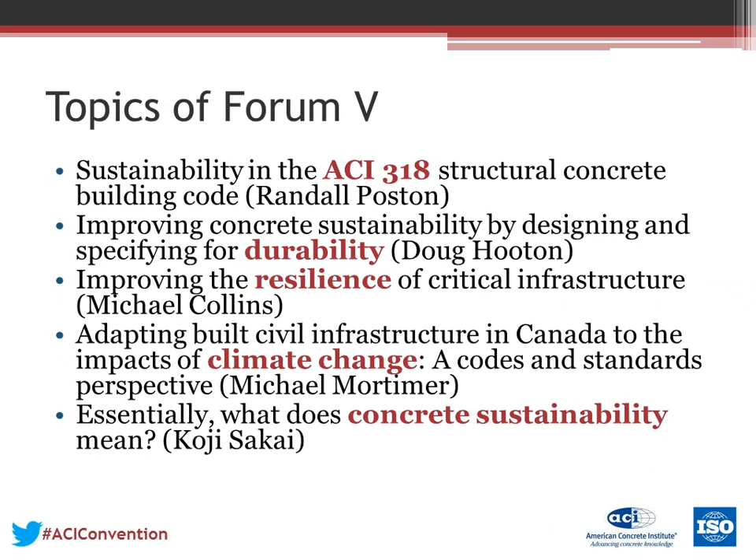And then we had Michael Mortimer, who came from Canada again. He talked about adapting built civil infrastructure in Canada to the impact of climate change, the codes and standards. And finally, I talked about what concrete sustainability means.

Then we had some conclusions from these speeches. The first one was the addition of sustainability to the 318 building code. They decided to include sustainability in the building code. It was mentioned that this is a start to embrace the spirit of sustainability in ACI.

Hooton concluded that the performance specification can increase the chances of obtaining durability. And Michael Collins concluded that robust wind and earthquake damping systems are needed to enable a new generation of more efficient and resilient designs.

We have been designing the columns of buildings by considering confinement, but after many years he concluded it is not enough, that we need different systems, like damping systems. This was a very interesting conclusion.

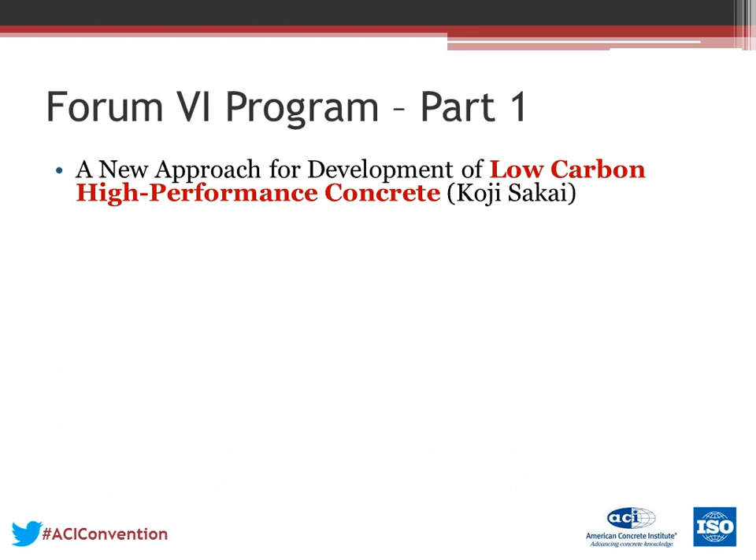And then we have Dr. Higuchi, from Japan, who is going to talk about the development of a new ecological concrete with carbon dioxide emissions below zero. And then we have the third speaker.

Dr. Barcelo from the Lafarge Cement Company. The title of his talk is A Path Towards More Sustainable Cement Manufacturing.

And then we have Professor Harald Müller from Germany. The topic of his talk is sustainable concrete structures through service life design and eco-efficient concrete.

And we have Dr. Noguchi from the University of Tokyo, Japan. He's going to talk about ISO standardization on environmental issues for the concrete sector. We are now developing ISO standardization on environmental issues for the concrete sector.

And then our colleague Julie will talk about what are PCRs and EPDs. Nowadays the importance of EPDs is greatly increasing, so she will introduce the essence of the current trend.

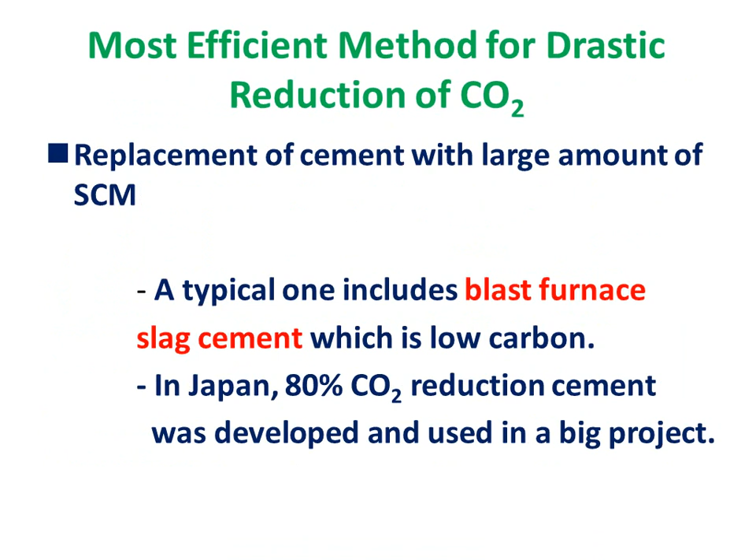In Japan, more than 10, 15 years ago, an 80% carbon dioxide reduction cement was developed and used in a big project, the Akashi Kaikyo Bridge, in 1998. This bridge is the world's longest suspension bridge. The main span is almost 2 kilometers, 2,000 meters, and the total length of the bridge is 4,000 meters.

There are two bases for the towers, shown here. We developed a low heat Portland cement for this tower foundation, as shown here. You can see the people here - very small. So you can realize how huge the tower foundation is.

So we introduced the low heat Portland cement. There are many developed cement concretes as shown here, from number 1 to number 12. Number 12 is the ordinary Portland cement, and number 10 and number 11 - this cement was applied for the foundation of this bridge.

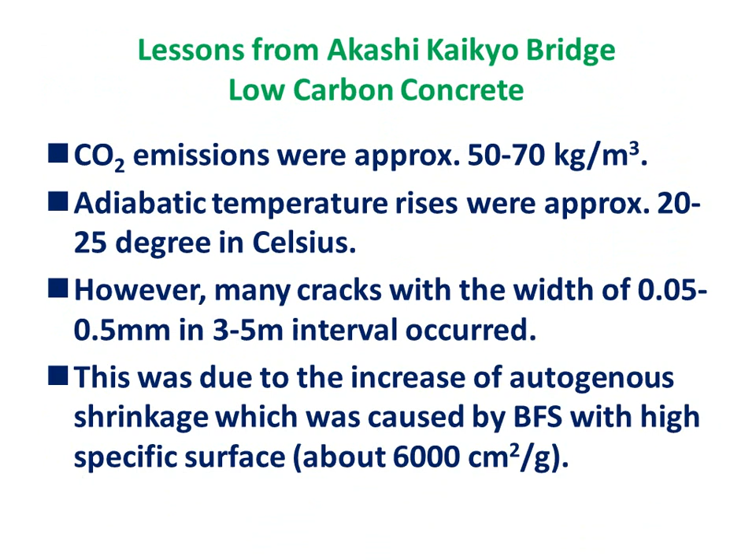So if you summarize the blast furnace slag concrete weak points: one is the large autogenous shrinkage, low crack resistance, smaller strength development, large influence of temperature and curing condition on strength development, and low resistance to carbonation. You can drastically reduce carbon dioxide emissions by utilizing this kind of concrete, but we have these weak points as written here.

As a result, we can say that we need to consider the resistance to crack in development of concrete. This is the point why we decided to develop the new concrete. There is information showing the change in compressive strength of cement in Japan.

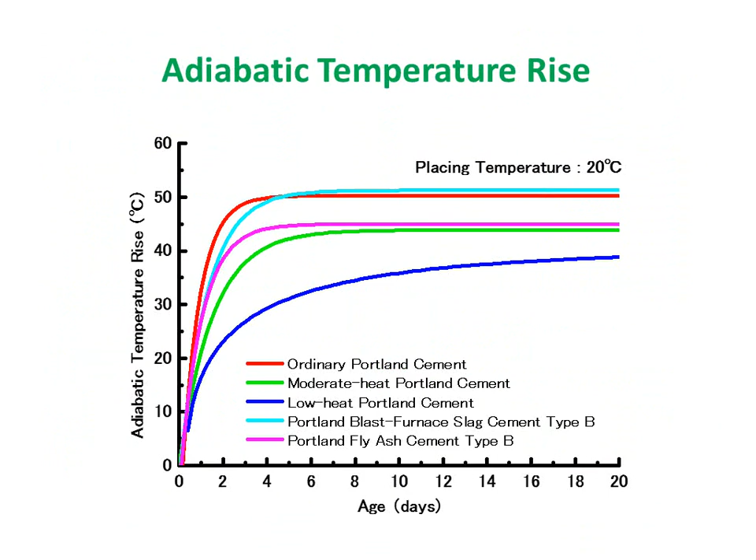So it means that if you utilize this kind of cement, you have the possibility to have cracks.

So it means that we have the possibility to do something by utilizing the supplementary cementitious materials.

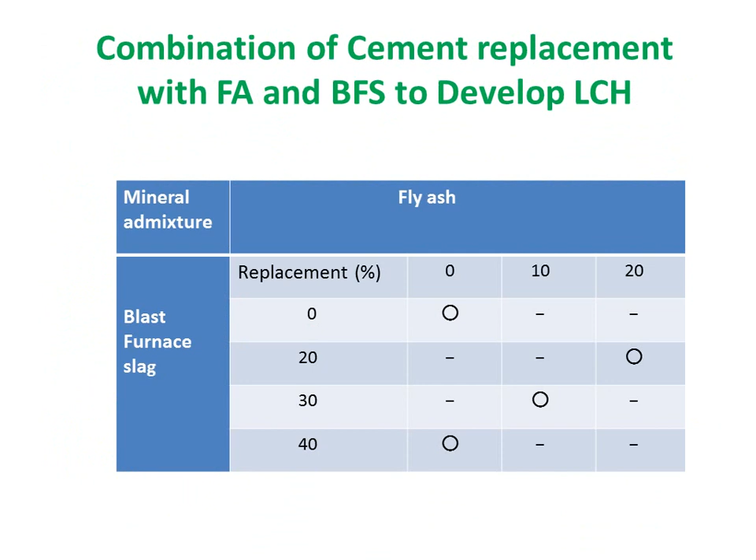...like compressive strength development. This is the ordinary Portland cement, and 40% blast furnace slag, and 10% fly ash with 30% blast furnace slag, and this is 20% fly ash with 20% blast furnace slag.

So we can see that there is a requirement for early stage strength to remove vertical formwork. In Japan, that number is 5 Newtons per square millimeter. So if you utilize this concrete, that requirement is satisfied.

And then finally, at 91 days the strength development is greater than the ordinary Portland cement, as you can see.

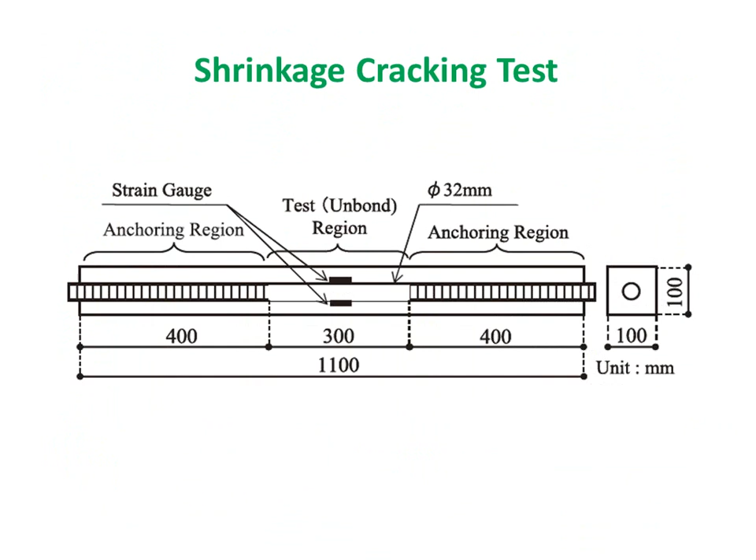We cannot evaluate the exact number of the cracking, but we can compare which concrete is better than the others by utilizing this test method.

And if we use expansive admixture, we could not see any cracking.

Then we conducted the temperature stress analysis of a constrained wall. We used nonlinear temperature stress analysis software, as shown here, and also calculated autogenous shrinkage strain using JSCE equations.

For the ultimate values of the autogenous shrinkage, we used test results at the age of 91 days. For the expansion strains, we used the test result at the age of 7 days. Under those conditions, we calculated results like here.

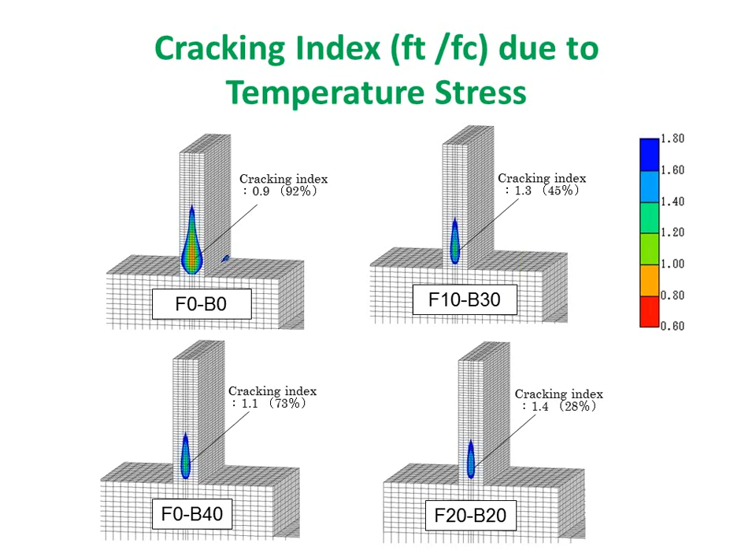This is also considered with plus expansion admixture. If you look at 20-20 in this case, it shows very low possibility of cracking.

We also conducted durability aspect testing of this concrete, including carbonation. The carbonation rate for FA20B20 was the largest, but the carbonation depth is just 31 millimeters over 100 years, meaning we can ignore carbonation performance as a concern.

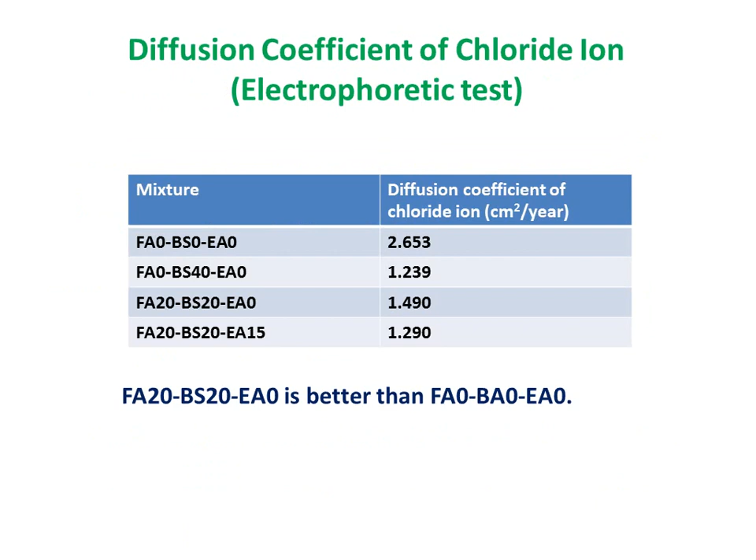How about the diffusion coefficient of chloride? 20-20 is better than ordinary Portland cement. So we found that we don't have any particular problem in the durability aspect of this concrete which we developed. So, conclusions.

This fly ash 20, blast furnace slag 20 concrete shows excellent performance in several points. First, 45% reduction in carbon dioxide emission. Second, increase of long-term strength development. Third, we can have adequate early strength development. And also, we have high resistance to cracking, and we don't see any problem in durability.

So this cement, with supplementary cementitious materials replacing clinker, would be possible at least in Japan, because we have a large steel industry and many power plants. So the production of fly ash and blast furnace slag is quite sufficient. Even if we introduce 20% blast furnace slag and fly ash, we still have remaining materials.

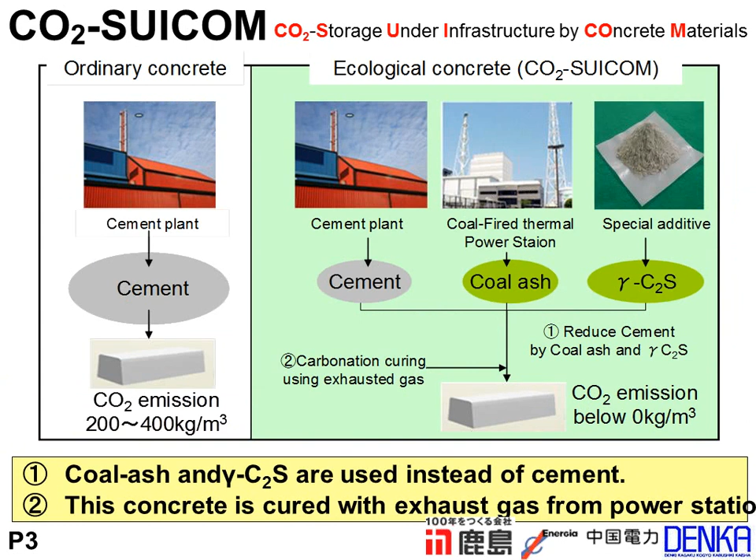The chemical and physical properties of gamma C2S are as follows: this substance consists of calcium oxide and silicon dioxide as its principal components, and the main mineral composition is gamma type dicalcium silicate. This is a powdery material, and this substance does not hydrate like Portland cement, but it reacts with carbon dioxide under optimum conditions.

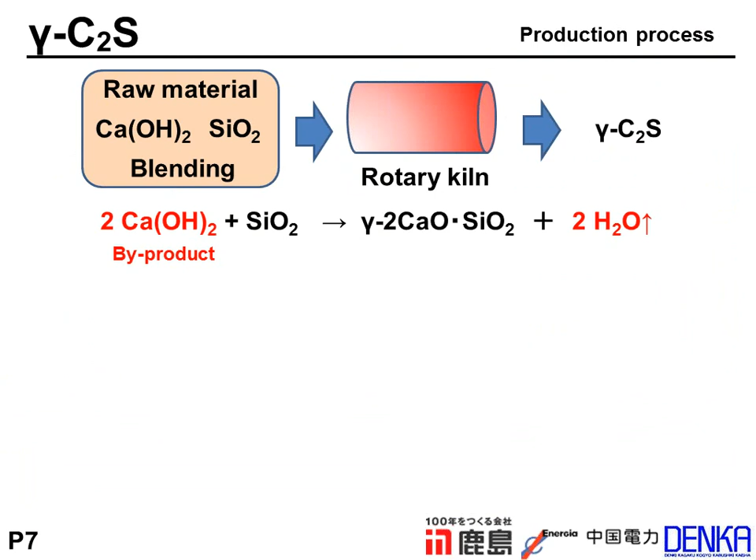This calcium hydroxide is a byproduct and does not emit carbon dioxide in calcination, so it's eco-friendly. Also, the clinker changes into powder automatically during the cooling process, so it's not necessary to mill the clinker. Therefore, the carbon dioxide emission of gamma C2S is very low.

On the other hand, gamma C2S absorbs 400 to 500 kg CO2 per ton theoretically, so it contributes to the reduction of carbon dioxide.

So for gamma C2S, which has environmental performance as one of its advantages, it's very important how to evaluate the amount of carbon dioxide in concrete. So we tried to address this problem.

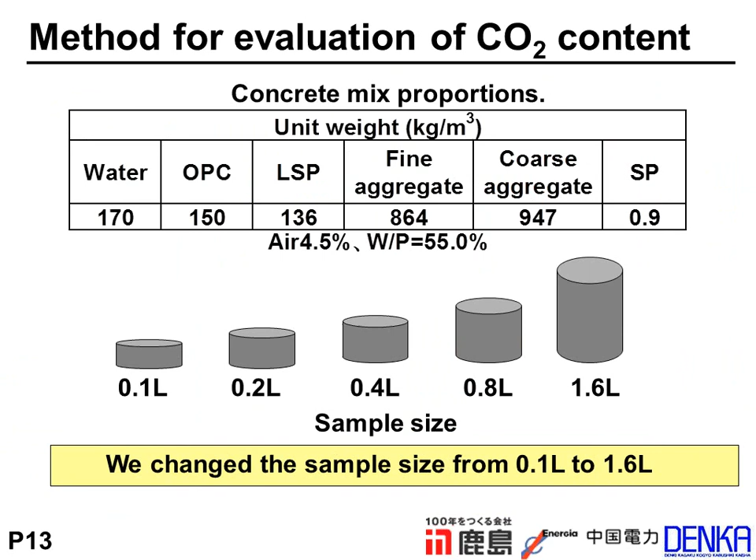So a volume of about 1.6 liter should be used in order to measure the carbon dioxide content of concrete with good accuracy.

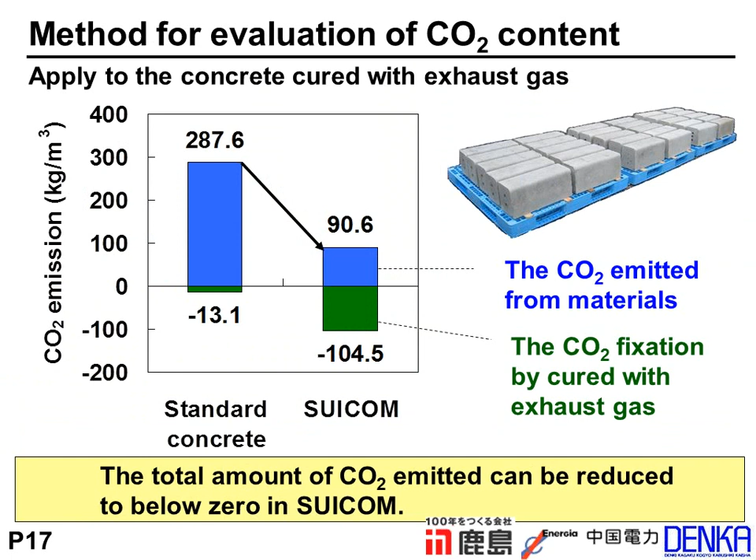Finally, I'd like to explain the properties of concrete, for example strength, drying shrinkage, and efflorescence.

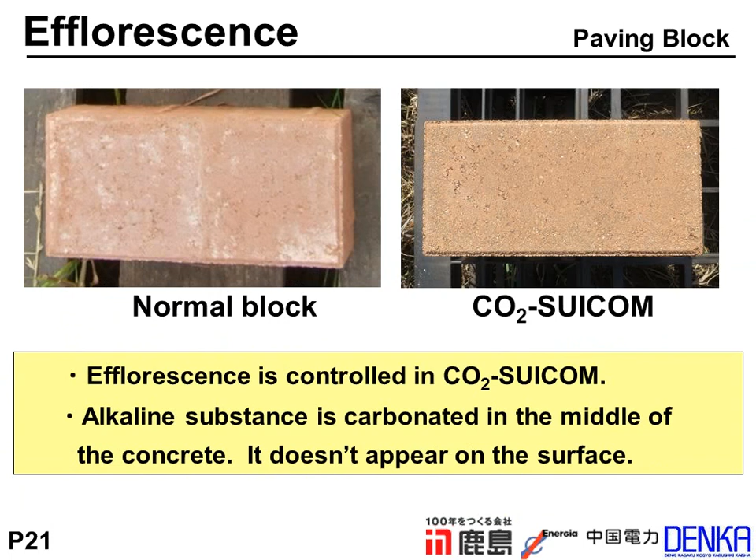The pH value of CO2-SUICOM is close to neutral by carbonation, so this condition suits the growth of plants. So CO2-SUICOM harmonizes well with the environment.

We have already applied this CO2-SUICOM to a mega solar power station as a sustainability facility, like paving blocks and border blocks. Two years have already passed after installation, and we have been monitoring the situation of the concrete.

Modern Portland cement is alkaline, so if it neutralizes from the surface with a steel rod, it generates corrosion. Therefore, it's not easy to apply CO2-SUICOM to reinforced concrete. On the other hand, volcanic ash, lime, and carbon dioxide are used for ancient concrete. Since the steel rod is not employed, the strength persists for thousands of years. So we hope that CO2-SUICOM contributes to the sustainability of the concrete industry, like ancient concrete.

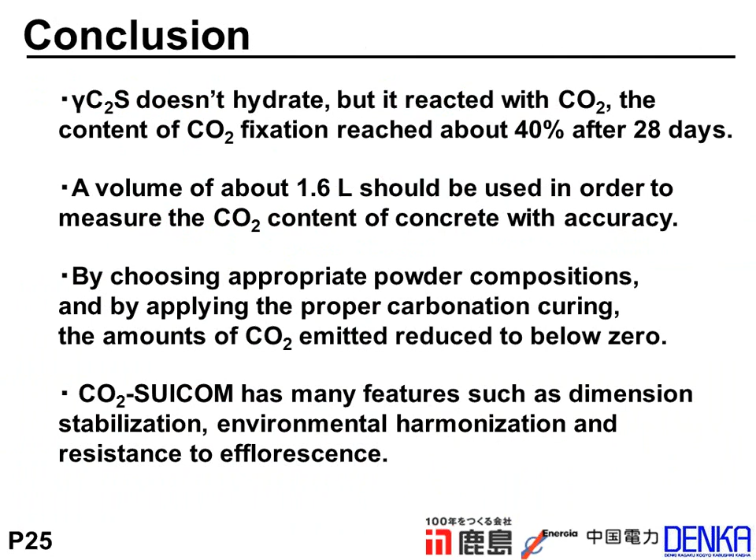The conclusion is below. The gamma C2S does not hydrate, but it reacts with carbon dioxide. The content of carbon dioxide fixation reached about 40% after 28 days. A volume of about 1.6 liters should be used in order to measure the carbon dioxide content of concrete with good accuracy. By choosing appropriate powder composition and applying proper carbonation curing, the amount of carbon dioxide emitted is reduced below zero. Finally, CO2-SUICOM has many features such as dimensional stabilization, environmental harmonization, and resistance to efflorescence. Thank you for your attention.

Thank you, Mr. Higuchi. It's a very interesting presentation. He introduced the name of this good, suikon, which in Japanese means absorbing. Interesting naming. But we have a few minutes if you have questions or comments, please.

When was the work done? When did it start? This project started 7 years ago.

We have a question from the webinar audience: can you clarify the method of calculation of CO2 emission in the sample concrete? So I repeat, we use the inorganic carbon analyzer to detect the carbon dioxide content. This device enables the measurement of only inorganic carbon gasified due to decomposition with the acid. The sample is cured, and at first the sample volume is measured. After drying, the sample is milled under 105 micron, and the content of the carbon dioxide is measured by the inorganic carbon analyzer, and we calculate the content of carbon dioxide using the volume of the specimen, so we change it to carbon dioxide content per cubic. I think the PowerPoint is being uploaded on the ACI website, so he or she can look at the details there.

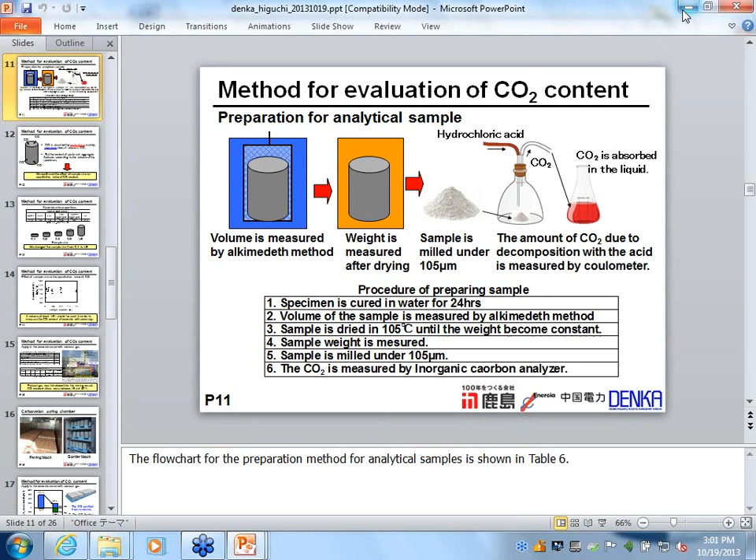So the next presentation will be done by Mr. Laurent Barcelo from Lafarge, Canada. The title of the presentation is A Path Towards More Sustainable Cement Manufacturing. Thank you very much, Mr. Chairman. So this presentation is entitled A Path Forward Towards More Sustainable Cement Manufacturing.

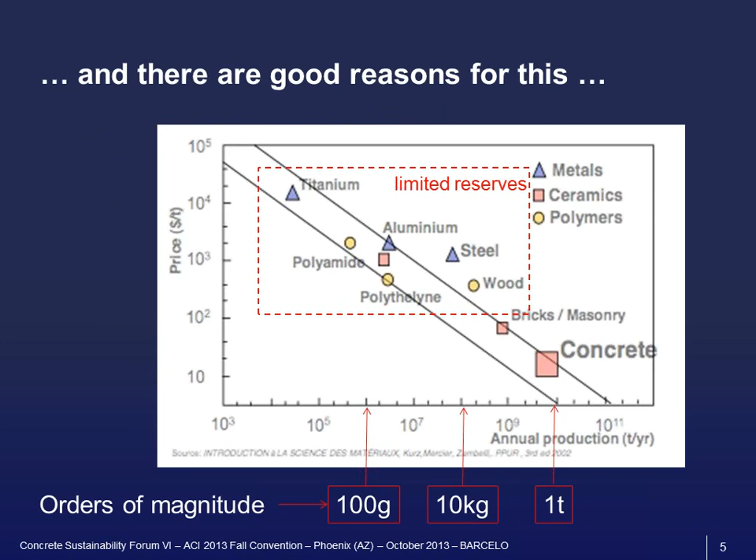Also, all these other products have limited reserves, but with concrete, with the majority being limestone, we have a lot of reserves. So cost, local availability in large quantities, ease of use, sometimes unfortunately relative robustness to misuse, versatility, durability when it's well done - very good reasons for this, and it's not going to end.

The projections from international energy agencies are that between now and 2050, cement production is expected to grow by 40 to 50%. Today, over half of world cement production is in China, and it's expected that this number will peak by 2015 to 2020, with production in China decreasing once they've built their infrastructure. But other countries are going to take off, so cement consumption or production is expected to grow very significantly.

And this popularity comes at a cost. It turns a material that has intrinsic low carbon emissions into a significant contributor to man-made CO2 emissions. You probably all know that globally, cement manufacturing is responsible for 5% of GHG emissions, and this is really the reason why.

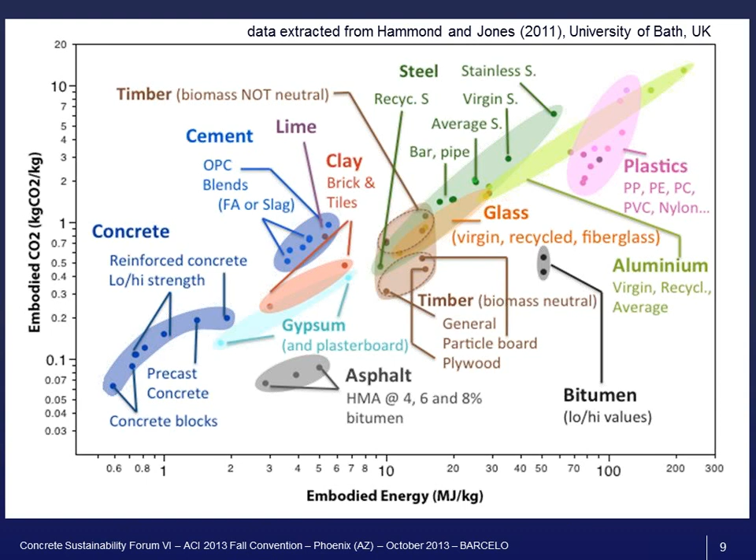I understand that ton-to-ton comparisons are not fair, and what we should do is a full LCA on a specific project. But this puts numbers into perspective, and I think we would not speak about CO2 in the cement and concrete industry if we produced as much cement as we produce steel every year, for instance. So really, we are victims of the very large volumes.

So these CO2 emissions in cement manufacturing, where are they coming from? The first source is CO2 from the calcination of limestone: CaCO3 becoming CaO plus CO2. It's about 535 kilograms of CO2 per ton of clinker, and this number is fairly constant from plant to plant.

The second source is CO2 from fuel combustion, about 330 kilograms of CO2 per ton of clinker. So it's a 60-40 split between decarbonation and fuels. But this number shows larger variation from plant to plant, depending on the process the plant is using. Add these two together and you have the direct CO2 emissions for clinker.

That's about 865 kilograms of CO2 per ton of clinker. This excludes the CO2 from electricity, which is the indirect CO2 emission. But we know that in the case of clinker and cement manufacturing, it's rather small, about 10% of the total CO2 emission.

We also know that cement is not 100% clinker. In 2006, CSI made a survey and found that the worldwide average was 78% clinker in cement. When you multiply these two, you get the direct CO2 emissions for cement manufacturing, about 680 kilograms of CO2 per ton of cement. You see it's quite far from the 1 ton of CO2 per ton of cement that we hear very often. I understand 1 ton is easy to remember, but it's really not 1 ton.

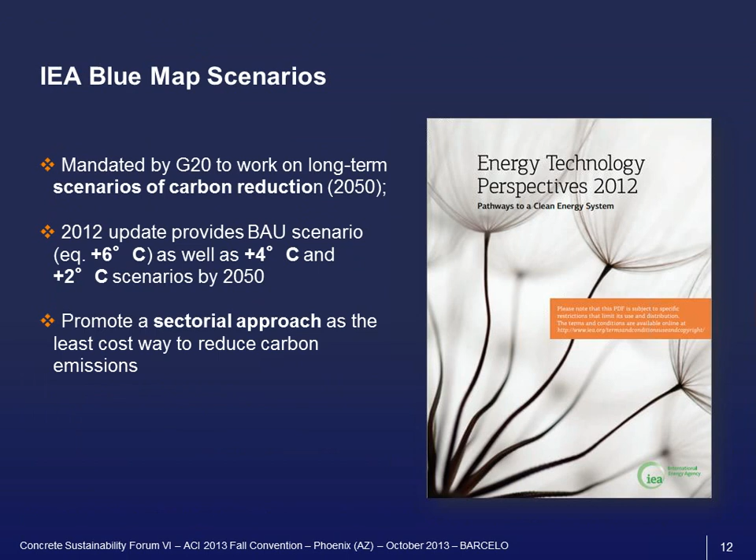One important thing for us is that they are promoting a sectorial approach, meaning they recognize it would be counterproductive to ask for the same amount of reduction in every sector, and it would actually cost more to society. So this sectorial approach is really favorable to us. They also led the development of technology roadmaps in key areas, and there is one for cement technology available that I'd encourage everyone to read. It's not a very large document.

If we look at the global picture, in 2007 worldwide we emitted about 30 billion tons of CO2. If we do nothing, by 2050 it's expected that emissions will double. The blue map scenario, to restrain temperature increase, says we should cut emissions by half compared to 2007, or by a factor of 4 compared to the baseline.

Because of this sectorial approach, the situation is different for cement. In 2007, the cement industry was responsible for 2 billion tons of CO2 emission. Business as usual would mean 2.34 billion tons by 2050, and what is expected for the industry is to go down to 1.55 billion tons.

So it's a 23% reduction compared to 2007 over 43 years. You could say that it's not a huge effort, but you need to factor in that during the same time, cement production is going to increase by 40 to 50%. When you factor this in, you see that per ton of cement, CO2 emissions are expected to go from 680 kilograms of CO2 per ton of cement to somewhere between 300 to 400 kilograms per ton.

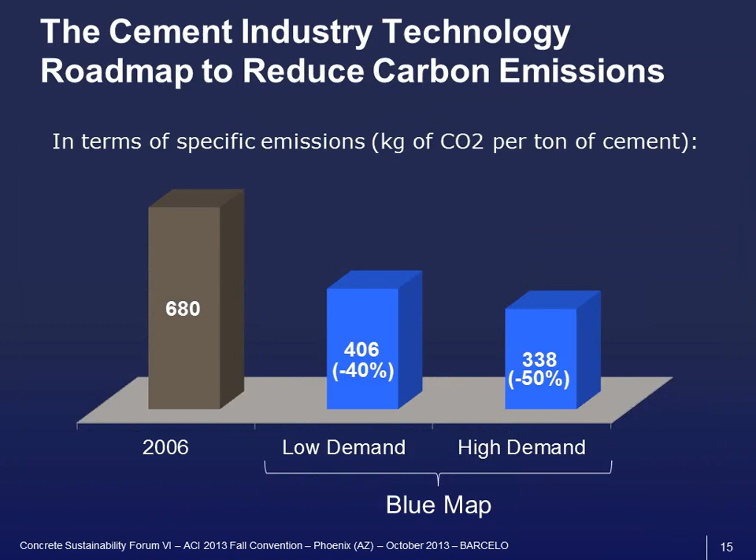So the cement industry has been using 3 main levers to reduce CO2 emissions. The first one, energy efficiency. Second, alternative fuels and use of biomass. And the third, clinker substitution. The first two play on CO2 from fuel combustion. The third, clinker substitution, is a very powerful lever because it's a multiplicator that reduces the overall CO2. We're going to take a look at each of these one by one.

Energy efficiency first. Here I've reported the energy efficiency for different types of processes in gigajoules per ton of cement. The old wet kilns were really in the range of 6 gigajoules per ton. The more modern kilns, the long dry, preheater, precalciner, what the industry considers today as best available technology is the 5-stage preheater with precalciner, at 3 gigajoules per ton of cement.

So it's about 50% more efficient than the old wet kiln. When you look at the theoretical energy consumption needed just for the chemical reaction inside the kiln, you need 1.75, meaning your efficiency with this best available technology is 58%, which is quite good. In fact, it's better than the engine we have in cars.

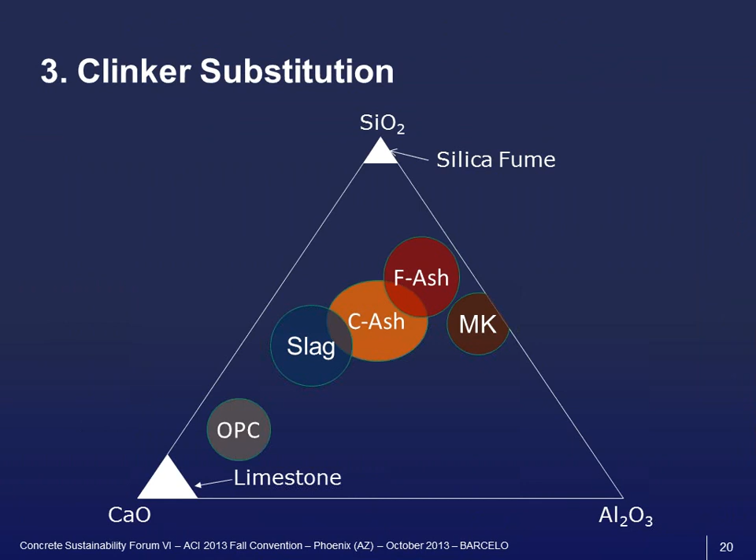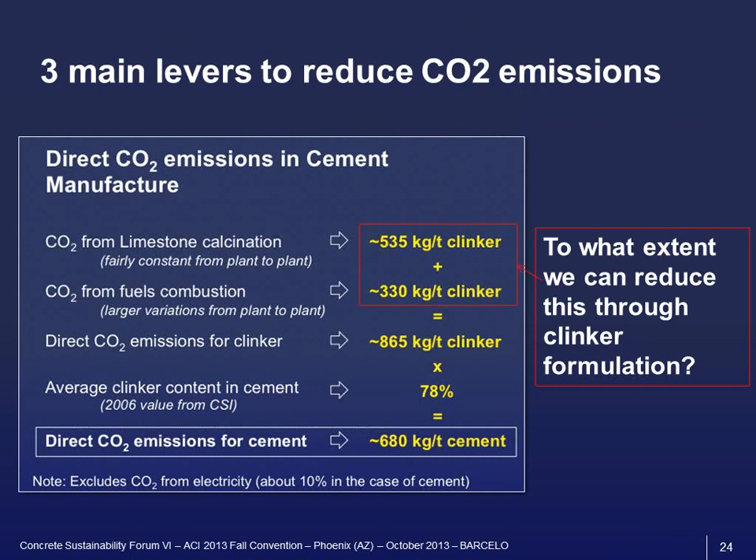What I try to do first is to explain what happens in the kiln, CO2-wise and energy-wise, when we want to produce C3S, the main component of modern cements. The first reaction that happens in the kiln is the decarbonation of limestone: CaCO3 becomes CaO plus CO2, releasing CO2 from the limestone. Driving this reaction requires a massive amount of energy, which translates into fuels that we need to burn.

So you can see here the double penalty with high limestone cements. We have a high amount of CO2 released by the decarbonation, and we have to go through this massive energy consumption for the decarbonation that translates into fuel. So it's a double penalty for a high lime system.

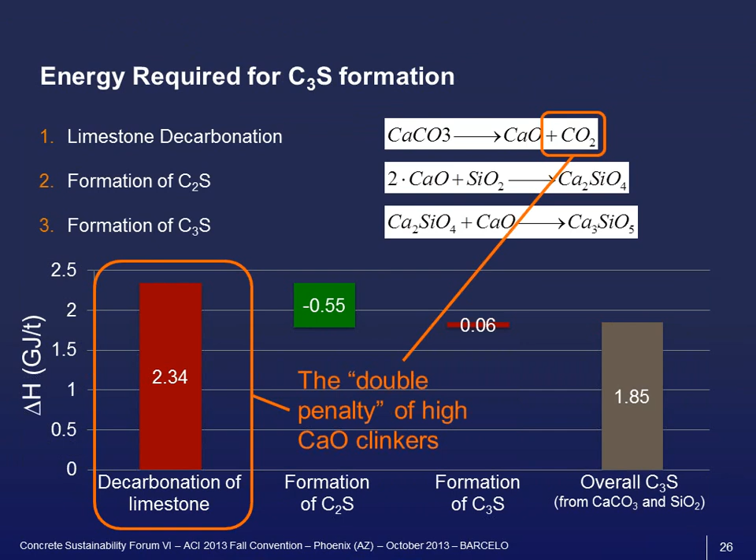So we can wonder, why not go through a C2S type of clinker? Why not eliminate C3S and make a clinker which is only C2S, C3A and C4AF — since we need a little bit of liquid phase in the kiln for the clinkering reaction — but why not go there? If we did, the CO2 footprint of the cement would be reduced by 12%, going from 816 to 719. The bulk of the reduction would come from the fuels, with only a minute reduction of CO2 from the raw materials.

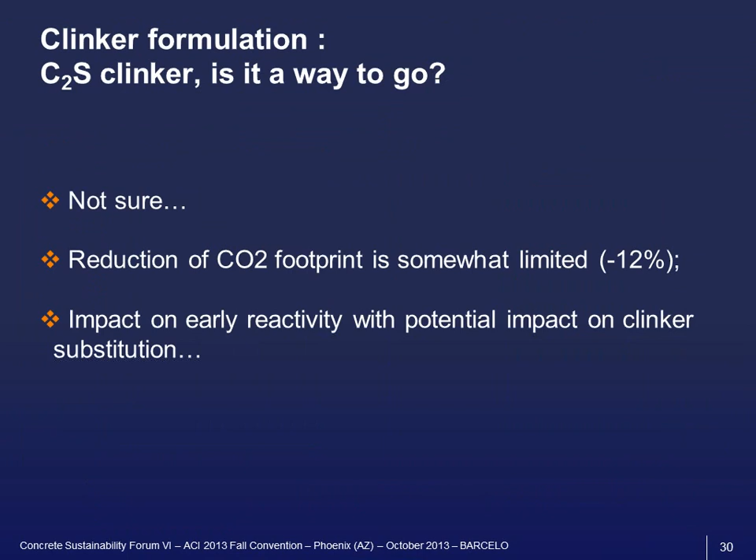So is it the way to go? We are not sure, because the CO2 footprint reduction is rather limited — it's 12% — not as significant as we would like. The second aspect is that if we go that way, chances are we would negatively impact the early reactivity of the cement, and consequently we wouldn't be able to use a lot of SCMs in the cement. So instead, we are proposing an out-of-the-box solution.

What are the characteristics of the solution we are looking for? We want a clinker that leverages all the current clinker advantages — available largely locally, cheap, nothing fancy — with a high level of early reactivity, at least that of OPC, that works well with SCMs, and that is durable, including steel protection, which discards solutions like CO2 curing. In addition, we want much lower CaO content to drive down CO2 emissions, and we want this to be manufacturable in existing plants, since building new plants is fairly expensive.

So what we are proposing is BCSAF clinkers, which we have trade-named Aether. B stands for belite, and here it's really activated belite that we are using — we dope belite with boron, producing a different polymorph of belite that is more reactive than the belite typically found in OPC. We still produce C-S-H for later age strength. CSA is the calcium-sulfoaluminate phase, producing stable ettringite that gives early age reactivity. F stands for ferrite, which is also quite important because it reacts, with a coupled reaction with belite to form strätlingite.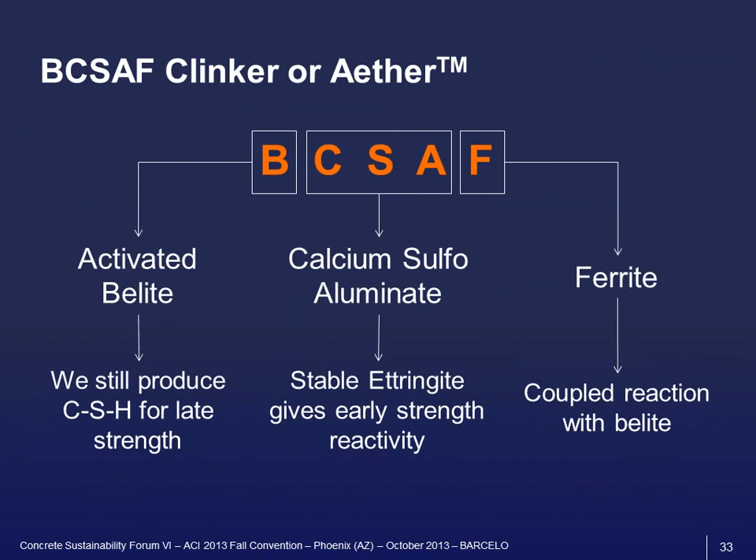The result of all this is that we can develop equivalent strengths for a lower carbon footprint. How much lower? Ordinary cement is at 816. With the theoretical C2S approach, we are down by 12%. With this approach, we are down by 30%. What's very important here is that we significantly reduce the CO2 coming from the raw materials, as well as reducing the CO2 coming from the fuels.

Where it is in this CaO, SiO2, Al2O3 diagram, so it's about here. You see it's not very far from ordinary Portland cement. Of course, there is a fourth dimension because there is the sulfate. So the belite is between 40 to 75%, so it's still the main phase. The calcium sulfoaluminate is 15 to 35%, and we still have 5 to 25% here.

So how can we achieve such a performance? You see that C3S and C3A were the phases with the higher CO2 footprint. We don't have them in this cement. Instead, the main phase is C2S. We have a little bit of C4AF, and we have a significant amount of this calcium sulfoaluminate phase. The CO2 footprint of this phase is very interesting, both on the raw material CO2 and on the fuel.

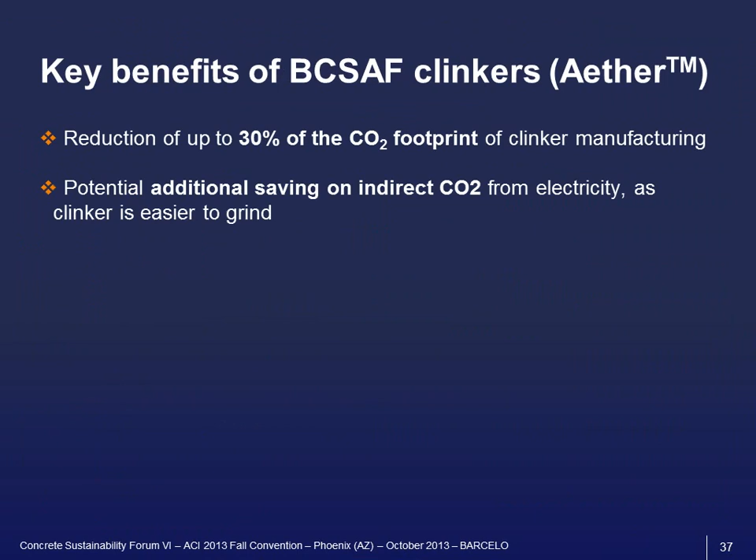So the key benefits of this: first, as we've seen, 30% reduction of the CO2 footprint. We have an additional saving on CO2 from electricity because these clinkers are easier to grind. We have a high level of reactivity that allows us to maintain a high level of SCM substitution, so we are not making a trade-off on that aspect.

We have a later strength development that is similar to OPC, and it can be manufactured in existing cement plants. We don't need heavy capital expenditures, and we can even potentially increase production rates because we are decreasing the burning temperature. We have already demonstrated that at industrial scale in real kilns, both on older generation and newer generation types of kilns.

Here we have an example of concrete made for precast application with this cement. We had a slump larger than 100 centimeters, with slump retention of 45 minutes to 1 hour for this precast application. The strength development is very interesting: 2900 psi at 6 hours with no heat, 3900 psi at 1 day, and 7000 psi at 28 days.

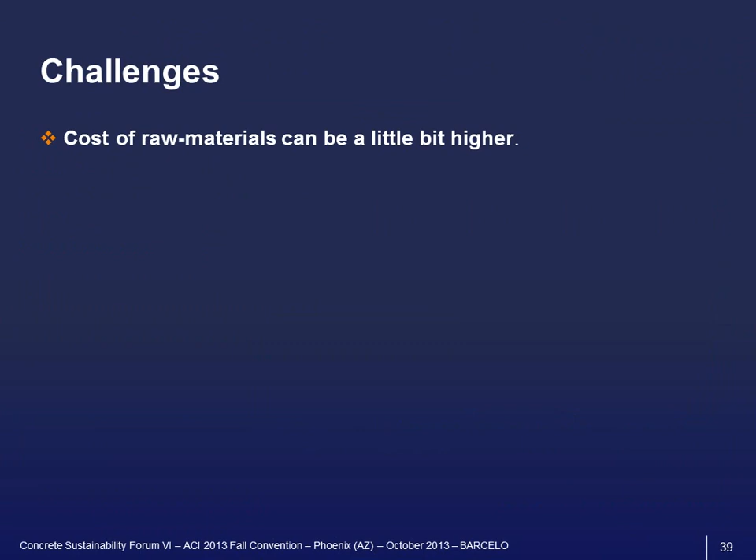Of course, we have a few challenges. The cost of raw materials can be a little bit higher, because we need more alumina in the raw meal. So some level of taxation of CO2 needs to happen to make this commercially viable at large scale. But the overcost, nevertheless, is very small, especially compared to alternatives such as CCS and so on.

The other aspect is that in cement and concrete science, we have 100-plus years of R&D, and we are still scratching our heads. So you can imagine that with, I think, 7 years of development here, we have just scratched the surface of it. Things are going to evolve, but finally specs, customer acceptance, and so on - these are challenges we are going to face.

So with that, I thank you for your attention.

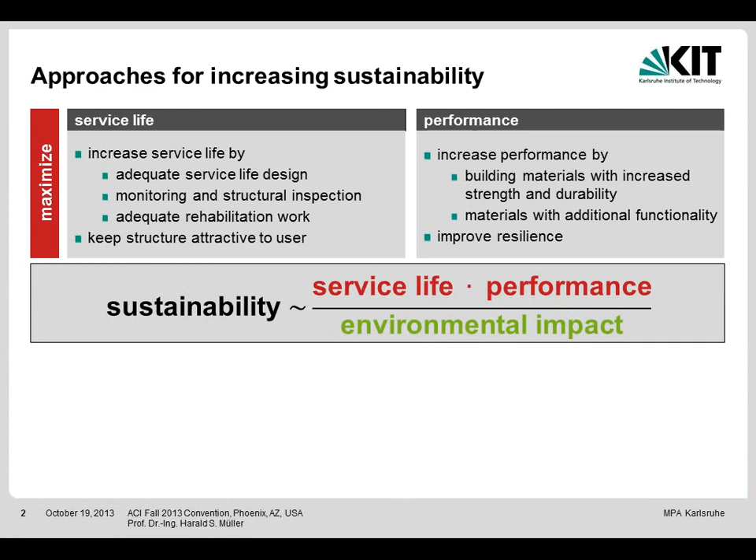First, thinking of sustainability, we have to define what we understand by it. I make a very simple formula, pushing aside social and political aspects. If we look at sustainability in this case, you see it is a product of service life and performance of concrete, divided by the environmental impact. If we look at service life, it has to be maximized to make a concrete structure sustainable. If we look at performance, it also has to be maximized to achieve high sustainability. And third, if we look at environmental impact, we have to minimize it, as the lower it is, the higher the sustainability. Now I will deal with these three different approaches in a little more detail.

First, the service life approach. Increased service life can be achieved by an adequate service life design method. Second, by improved monitoring and structural inspection, or by adequate rehabilitation work. Another aspect is to keep the structure attractive to the user.

We have first only an initiation period, and then when the overlap came, first damages increase until finally a collapse occurs. This is a situation we have in practice, and now we deal with this in our design. We apply in all countries so far a prescriptive concept. We have a very simple approach.

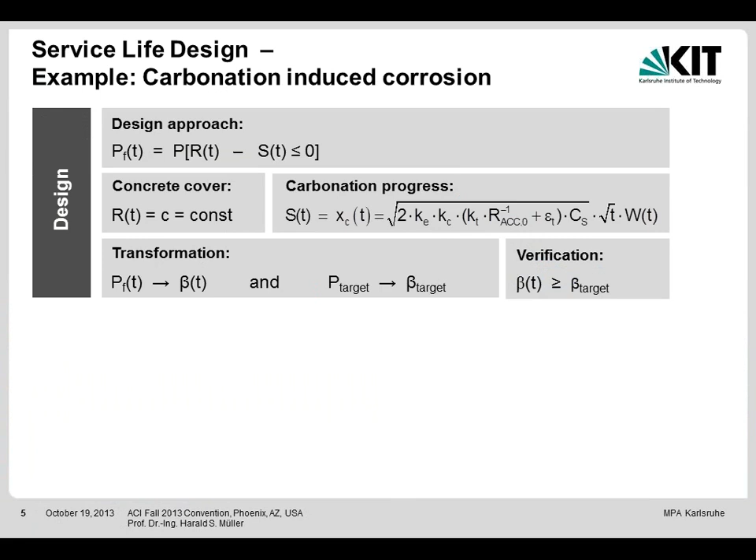It sounds much better. From a mathematical point of view it's the same, but it's better to speak of reliability than of failure probability. If we look to the result, we get the reliability index calculated from this formula over the age of the structure.

This is a design situation where the owner, for example, defines the service life of his structure. The beta target may be defined upon the damage which I am ready to accept, or the risk, or the owner's interest, or something else. You are free to decide this in your calculation.

Let me give you a very simple example. If you have, for example, a tunnel, with a tunnel top, walls, and floor, and the boundary conditions are a service life of 100 years. You accept 5% damages, which means a reliability index of 1.7, and your limit state is depassivation of the reinforcement.

Then it was carried out, and if we look, for example, just to the concrete cover, these were the design values: we have a mean cover of 55 millimeters and a standard deviation, which is unavoidable, of 8 millimeters. Then we arrive at a life age of 100 years.

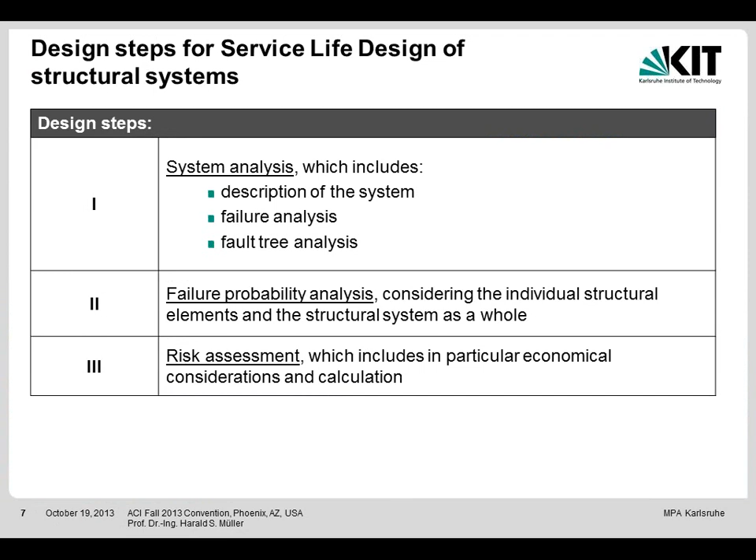If we look, for example, at a structure like a superstructure of a bridge, we have to make an element breakdown, which can be rather simple. We have to assign to the individual components - the carriageway slab, the caps, the webs, and the tension and compression chord - the major exposure conditions, and we have to define the critical ones.

For example, the critical one for the carriageway slab is chloride-induced corrosion. You go through and define an easy procedure for the major exposure condition and the critical events, then bring those things together in a fault tree for the superstructure.

Very easy to do here if you have chloride-induced corrosion or carbonation, or for example also alkali reaction or corrosion of tendons. All of those may lead to a complete failure. But they interact, and there is a further parameter, just a simple one.

We know that chlorides and carbonation have a particular interaction. Carbonation may release chlorides which had been bonded before. So doing this calculation, we have to take those things into consideration, and this may actually be done.

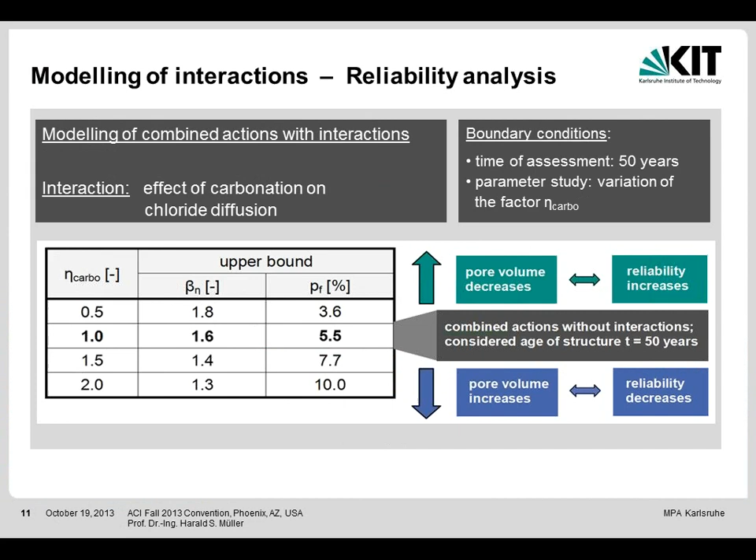I could go more into detail, but I have some other subjects, so I'll switch to the next one.

I look to the second approach, and the second approach means to minimize environmental impact. We have already heard in the previous presentations that we have to use other materials, composite cements, and so on. We have to develop concrete with a reduced binder or cement clinker content, and we have to apply environmentally friendly production and building techniques.

I will focus on environmental impact in a little different way than has been done before. If you look at the standards which are available, we have categorization in 6 classes - 6 different categories: primary energy, global warming potential (CO2), ozone depletion, acidification potential, eutrophication potential, and photochemical ozone creation.

They are delivered to you because there is an environmental product declaration, which since the year 2013 in Germany must be delivered by the producer of the raw material. And there you can read in detail the ecological impact of all those parts.

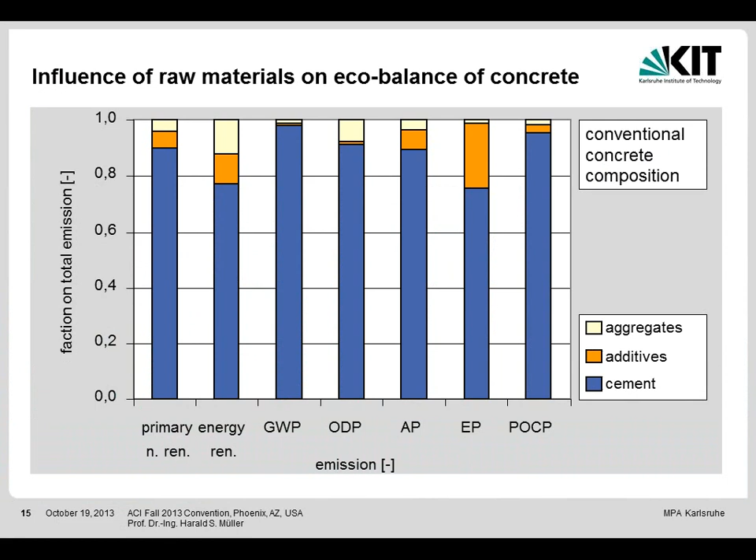This means if we would like to change things, we have to look to cement. Only if we look to the additives, in some cases where we use a lot of additives, then some effects are adverse concerning the production of concrete.

But the cement is a decisive part. Now we can consider what to do. The thing is, use as low cement as possible. We have to look at what is the binder intensity.

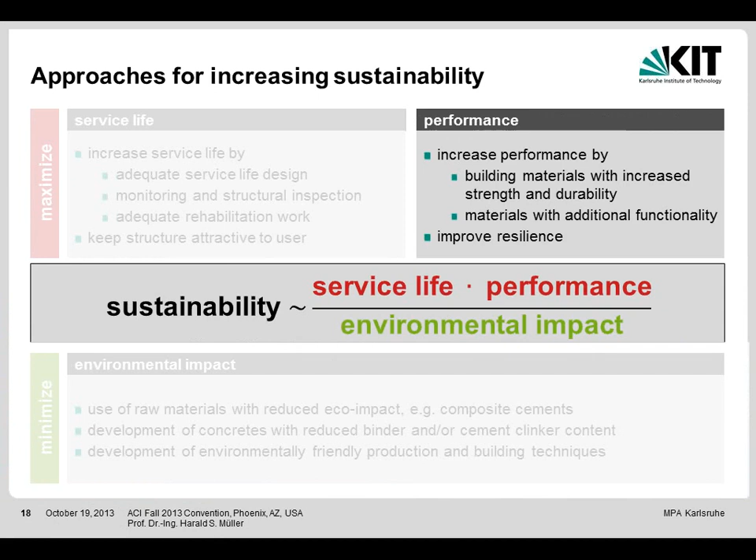Everybody knows if you reduce the water binder ratio, we arrive at high strength concrete, and for very low water binder ratios, we arrive at ultra high strength concrete, which can have a very, very high strength. At the same time, when reducing the water binder ratio, we have an increase of the resistance against chemical attack and other attacks, and the key goal behind is the minimization of the porosity. The basic requirement means a low water binder ratio, but at the same time we need sufficient workability, so we must use superplasticizer admixtures, and we must develop and optimize granular packing. There is much potential in this, but I don't go into details.

I look now to the other part, to what may be done if we go to very high strength concrete, ultra high strength concrete. Sorry, one moment.

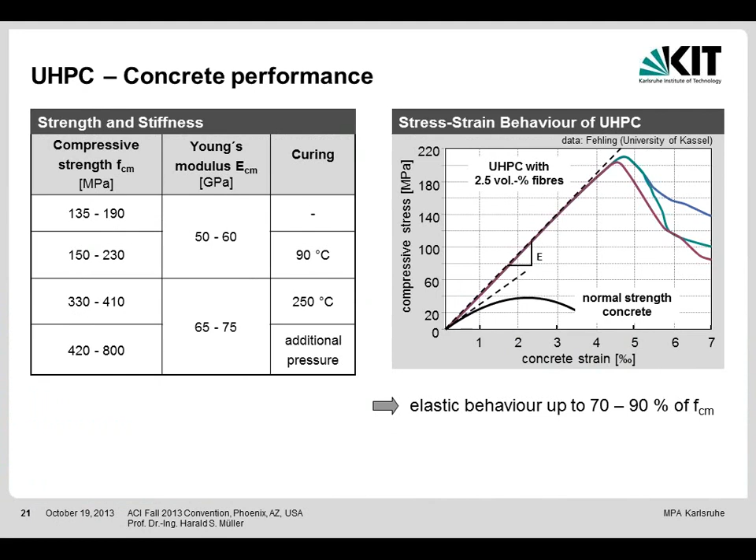Let me sum up. The sustainability of concrete and concrete structures will be increased by increased durability and by application of service life design, by reduced environmental impact of the raw material, or by an increased performance of concrete and the whole structure, or combinations of this.

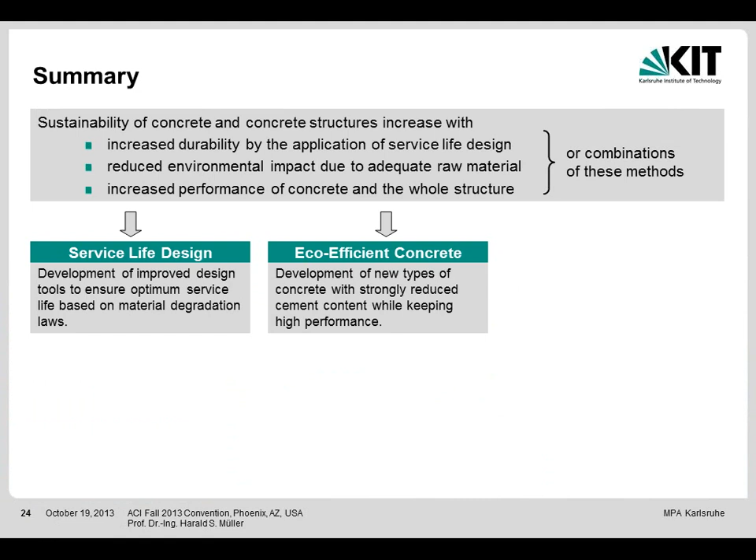Then if you use an eco-efficient concrete, you must apply new types of concrete with strongly reduced cement content while keeping high performance. This can be done, though not completely. There are some open questions here, and also some open questions there.

And for high performance concrete, I showed that the development of concretes with strongly increased strength and durability ensures a maximum of performance. The problems we have are manifold.

First, we need adequate material laws, in particular to predict the degradation behavior. I showed you some of these models, but we now have to further develop them. It is not enough. There are a lot of open questions, but it is already embedded in a guideline in the Model Code 2010.

And what is also needed is that we understand the mechanism to decouple concrete strength and concrete durability. Mostly we increase strength and we reduce at the same time the water-cement ratio, and then we increase durability. So the advantage would be to uncouple both, to have a concrete with low strength and high durability, which is difficult to produce for the time being.

Thank you very much.

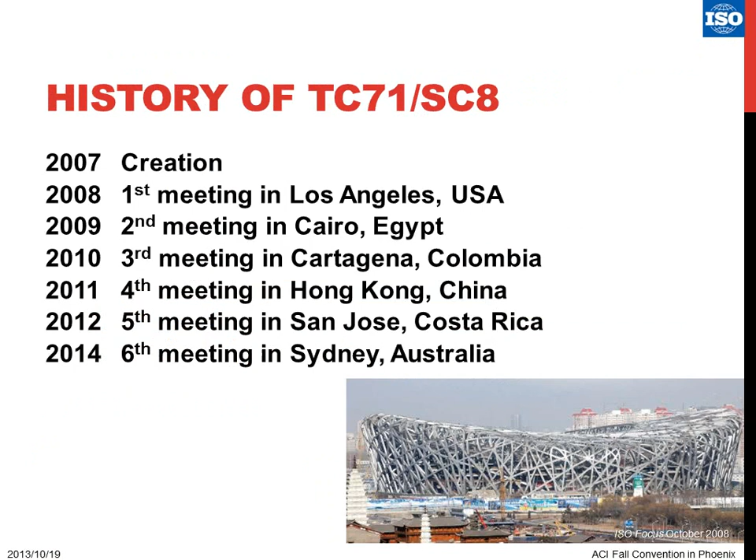This TC71 subcommittee 8 was established in 2007, and we already have 5 meetings every year. The next meeting will be held in Sydney, Australia. This subcommittee 8 is chaired by Professor Koji Sakai, who is here, and the secretariat is Japan, and I am in charge of the secretary.

Now we have 13 participating countries as active members, and 10 observing countries. The United States is a participating country. They are very active in establishing the ISO standard on environmental issues in concrete.

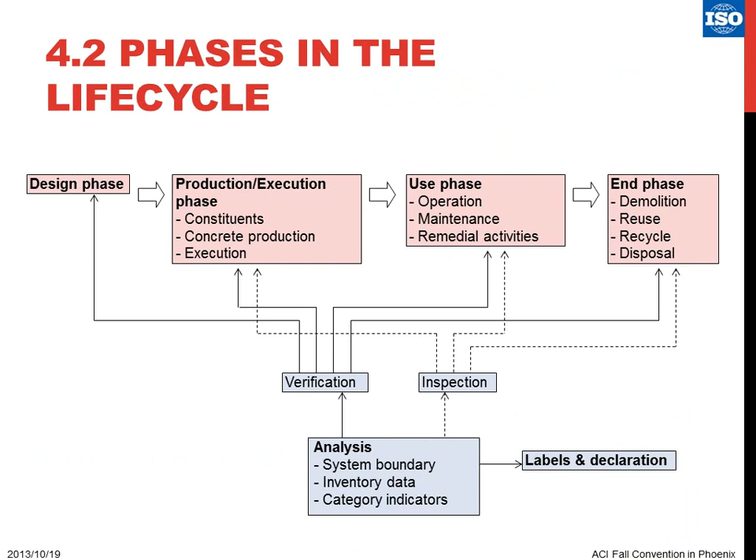In part 1, we have categorized the environmental impact into categories: global climate change, natural resource use, land use, eutrophication, acidification, air pollution, and so on. In these categories, we have to evaluate, estimate, and verify the impact to meet the requirement.

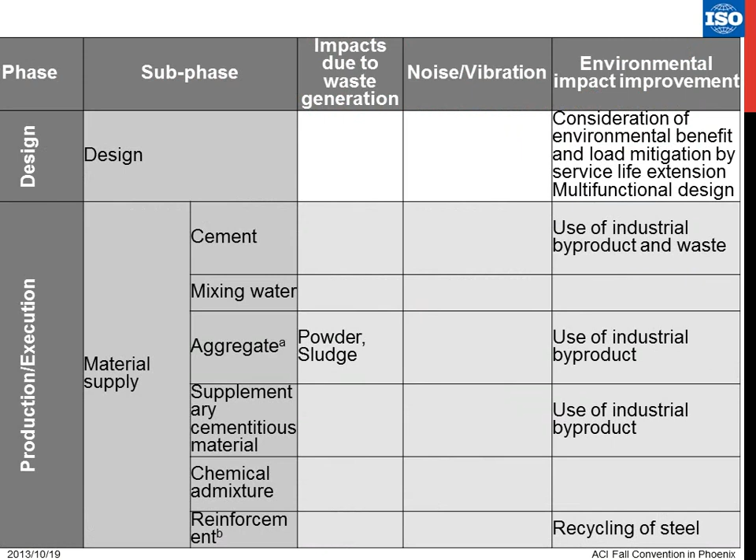Also in the design phase, we can consider the environmental benefit and load mitigation by service life extension. It should be in the design phase. And also, the multifunctional design can contribute to the reduction of the environmental impact. In the material supply phase, for the production of the aggregate, the use of industrial byproduct can be considered as a beneficial impact.

At the end phase, we may consider the CO2 uptake after the demolition of structures, and the recycling phase and the disposal phase. This table shows the environmental impact which should be considered in each phase, and also which impact should be considered in each phase.

In part 1, how to reduce the environmental impact in each phase is described like this: the execution of concrete structure shall be carried out to reduce energy consumption and waste generation during procurement, scaffolding, forming, reinforcing, compacting, curing, erection of precast elements, and so on, and to minimize damage due to noise, vibration, dust, air pollution, water pollution, and soil contamination.

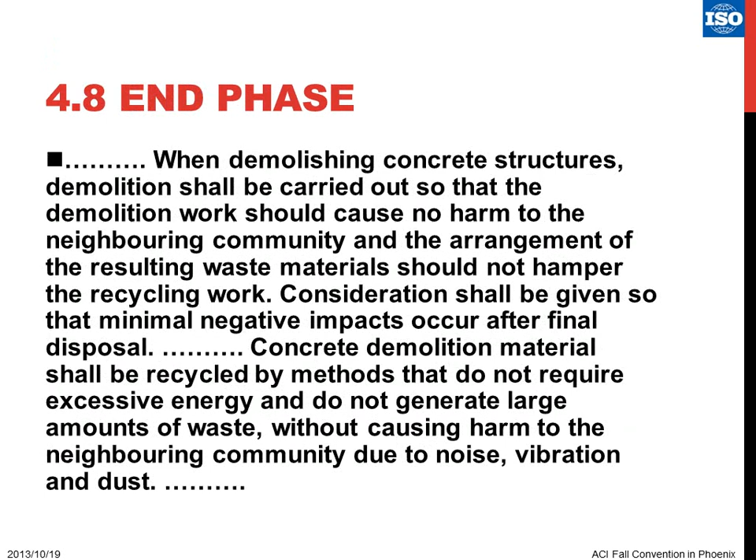This is given in part 1. And also in part 1, the result of the environmental impact assessment for concrete and concrete structures can be used for environmental declaration, rather than just environmental evaluation. It's a very simple statement in part 1, and in part 8, which will be issued some years later, a more detailed requirement is given.

The next is part 2. This part 2 specifies the system boundary and the inventory data, which is very important to make a life cycle assessment of concrete and construction in the design phase, and also in the production phase, distribution phase, and in each phase. So this is the table of contents.

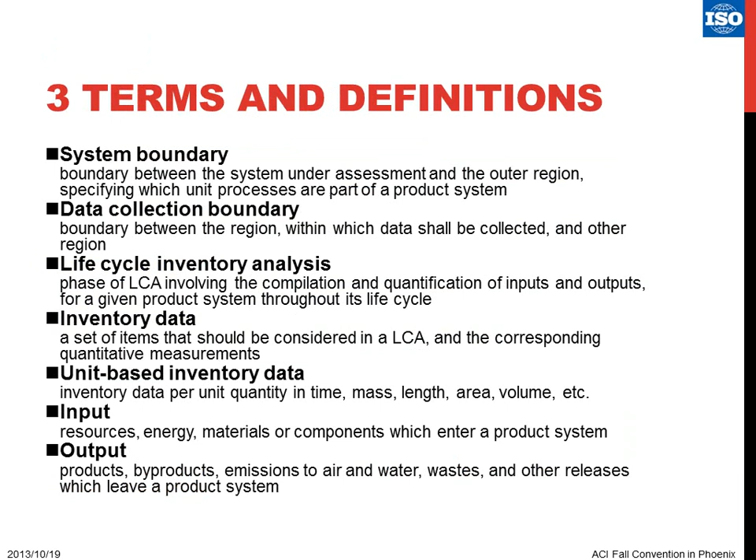So in general, for the system boundary: when conducting a life cycle assessment of concrete or concrete structures, the system boundary shall be demarcated. This is a very essential requirement. And for comparison among multiple alternatives, the system boundary shall be the same for all alternatives. This is very important to compare several projects and several technologies. For system boundary demarcation, the life cycle stages and the geographical system ranges to consider should be appropriately defined.

It is not necessary in principle to include in the system boundary the environmental impact related to the production of equipment and machinery necessary for producing concrete or construction. So we don't care about the environmental impact generated in the production of equipment machinery.

Also, activities indirectly related to the production of each material or the construction of concrete structures, such as sales administration, are very small and may not have to be included in the system boundary, but we can neglect this amount.

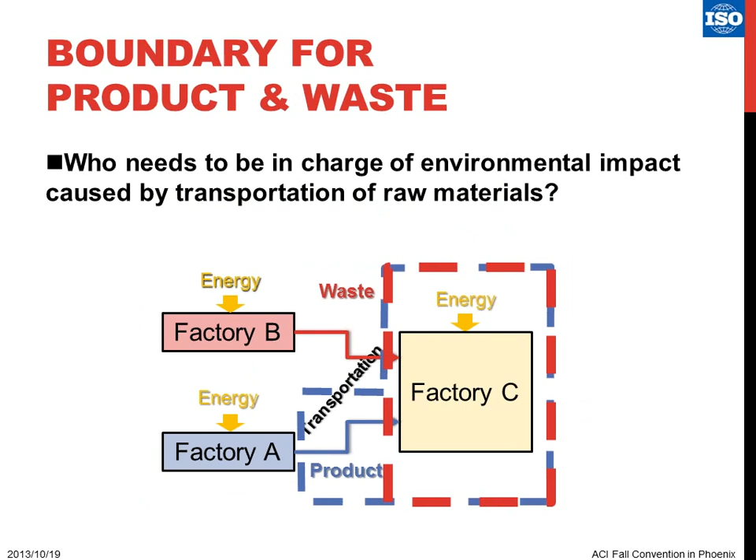So this is the answer from our discussion now: this transportation should not be included in the boundary of factory C. So it depends on whether the material is a product or a waste.

Okay, so the next chapter is the inventory data. In general, inventory data include the following: the data on the types and amounts of resource, energy, materials, and components input into the system boundary, and also the output from the boundary. Inventory data shall be objective, transparent, and reproducible.

In order to accurately acquire and calculate such inventory data, it is desirable to conduct actual condition surveys and trial experiments. But unit-based inventory data acquired and calculated in the past under the same condition may be utilized if available.

But in that case, reliable unit-based inventory data should be shown in writing — the company shows they utilize inventory data supplied by some reference. The means, conditions, and information sources of the acquisition of inventory data and the calculation of unit-based inventory data shall be expressly indicated in writing.

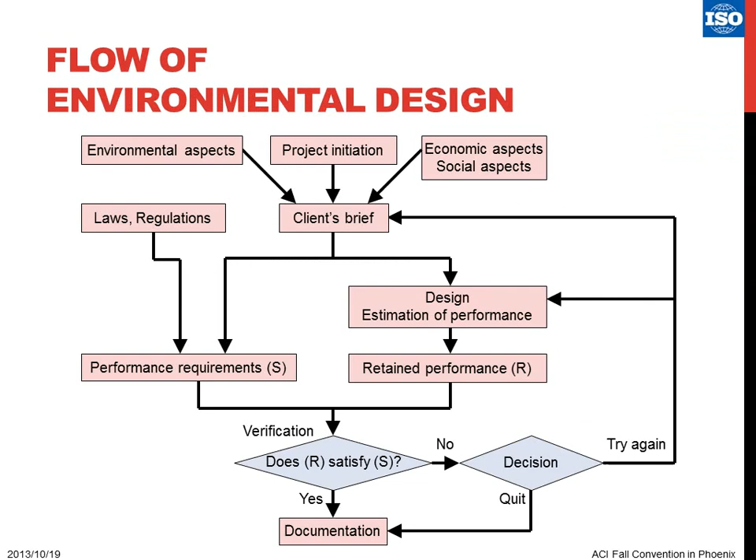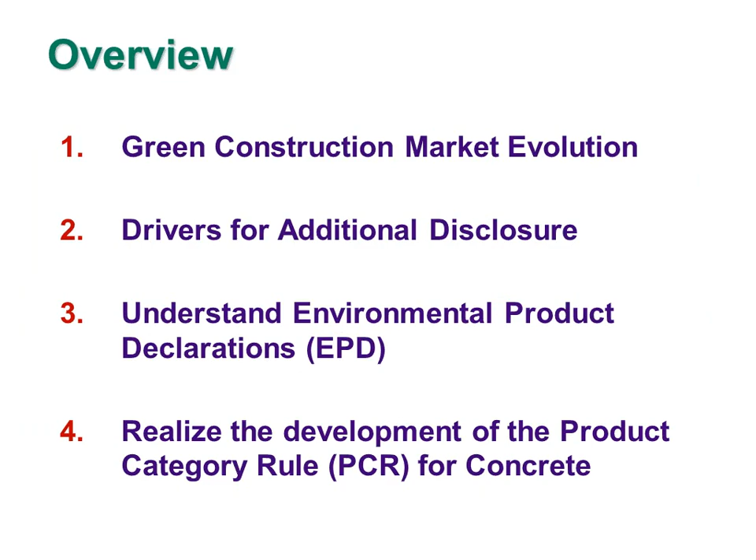Certainly if we look at green construction growth, it's nothing new for many of us working in sustainability for the last several years. It's grown to almost 71 billion in 2010, and its growth potential is about 145 billion in 2015. We can see that there are labels across all boundaries, all continents. There's about 495 labels today that we can point to all across the world.

So you can see that when you see all these differential factors and different rating systems and versions to have sustainability or greenness attached to them, we have to come to some common definitions or common science. If we look at North America, we're really looking at these specific standards: LEED, Architecture 2030, Green Roads, the International Green Construction Code, Invest, Envision. All of these are really leading in different sectors. But it comes down to, what can we find that is common across all these different rating systems?

Certainly the USGBC and the LEED rating system are the most dominant that we see in North America, and they are on the horizon throughout all the countries across the world. I receive questions from Croatia, I see questions from Singapore. We're starting to see the emergence of LEED and versions thereof in different countries. But it still remains the most popular and most adopted rating system here in North America. And certainly we can see its influence: almost 7 billion square feet are in the pipeline today for new buildings that will be under the guise of the LEED rating system.

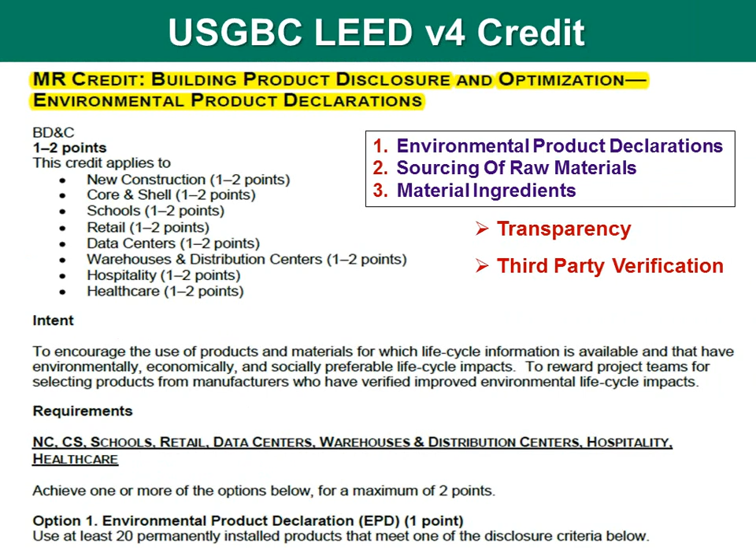When we look at one of the credits in the new version of USGBC, it's looking at building product disclosure and optimization, environmental product declarations, also known as EPDs. What's important is that for the first time we're asking for more transparency and, more importantly, third-party verification. So we're looking at EPDs, where the source of your raw materials is, and what the material ingredients are and how they play into the overall environmental impacts.

How has this changed? When we first started looking at LEED and other rating systems, it wasn't scientifically based information, but there were labels attached. There was a Type 1 label, which was something about it being 'all natural.' But we can't prove that it's all natural. We just know that they call it all natural.

In the last versions of LEED—2.0, 2.1, 2.2, and version 2009—we looked at something called a Type 2 declaration, which was really ISO 14021. It was a self-declaration. The problem was that as we've become more familiar with sustainability, we've seen that manufacturers could look at their products and make statements that weren't very scientific. That was looked at as greenwashing.

So our next step is to move ahead in the sequence and become more technical and more transparent, so we can look at a product and see how sustainable it is, or more so, what its environmental impacts are. That's where we come to ISO 14025, looking at what I'll call a Type 3 eco-label. We now look at this in the industry like a nutrition label—an actual label where we're quantifying scientifically based on ISO boundary situations.

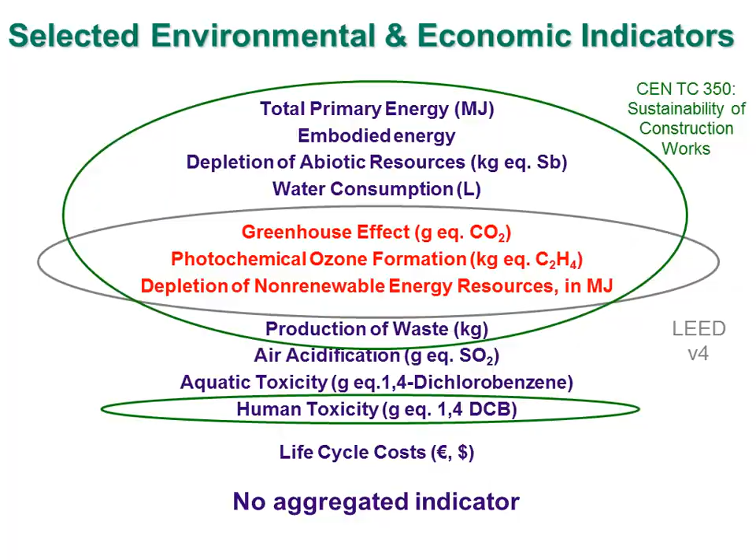But we're not here to talk about all these things. We're really talking about EPDs. So who is behind this change and why we're starting to look at environmental product declarations?

Well, certainly I think one of the main drivers here has been Architecture 2030. And we've also seen the USGBC and their change from what I would call less technical guidelines to more scientifically based guidelines. They heard the people out there that said, we like your ideas, but there's no science behind them. So why are we comparing apples to oranges? When we look at a science-based approach, now we can really compare oranges to oranges. And certainly we look at the IgCC and their construction code, and we've seen lots of local and state incentives. But really the main driver is Architecture 2030.

And it's really been adopted by 70 of the top 100 architects. Now when I talk about architects, we're not talking just about North American architects, because as the world has more telecommunication, more ability to communicate, most of the architects are working on worldwide projects. So it's not just about North America, it's really a worldwide change.

So certainly we're looking at the reduction of greenhouse gases and their impact on building operations and materials, and finally getting to that net zero. As Dr. Barsalov said, the population is growing. We still need more cement, but we have to get there somehow, some way. And when we start looking at products and how we can choose our products, we must start choosing wisely.

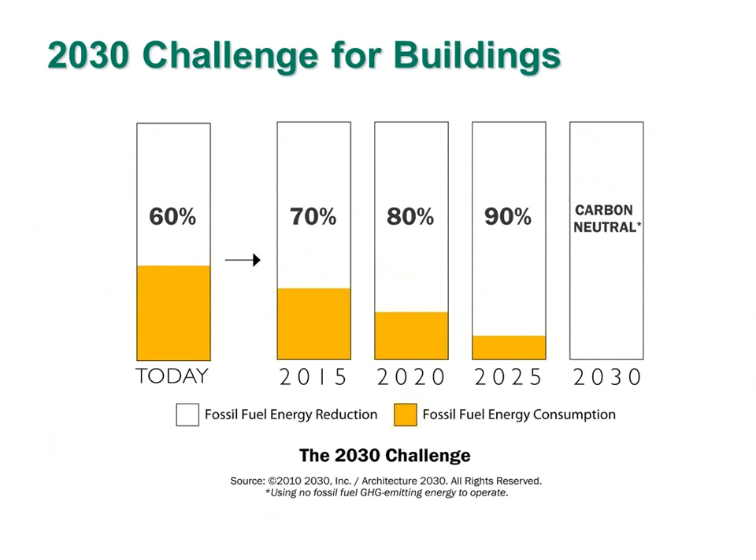So we look at the challenges for buildings, and we heard a little bit about what if I change my structure and it's an ICF structure? We need to go to carbon neutral. We need to go further. So now we have to look at how we can impact that.

Certainly we look at a challenge for products. So now if we look at this, we've gone from the building now down to the products. How can we quantify the impacts of those products? We can't really quantify if we just say, I believe it's sustainable and it's got 20% recycled content in it. It's really not talking about environmental impacts on the overall usage of that building or the use phase of that building.

So certainly we have to do this better. As I said, what are the stakeholders? The top firms that are working around the world, not the top firms just in North America. They're around the world. We look at ARA, AECOM, URS, Jacobs, Bechtel. All of them are working on worldwide projects.

If we were at the international luncheon tomorrow, we would hear about the Panama Canal. Again, worldwide engineering systems that are being looked at. And not only that, we have contractors, Turner, Gilbane, the big names that we have heard from around the world are all now looking at how can we scientifically capture and how can we account for what we do in buildings.

So when we look at sustainability, we still see ASTM. And ASTM, again, has announced that their intent is to look at PCRs and study PCRs and EPDs, but more so they're going to become a program operator so that they can help quantify for others in the industry what the environmental impacts are through environmental product declarations.

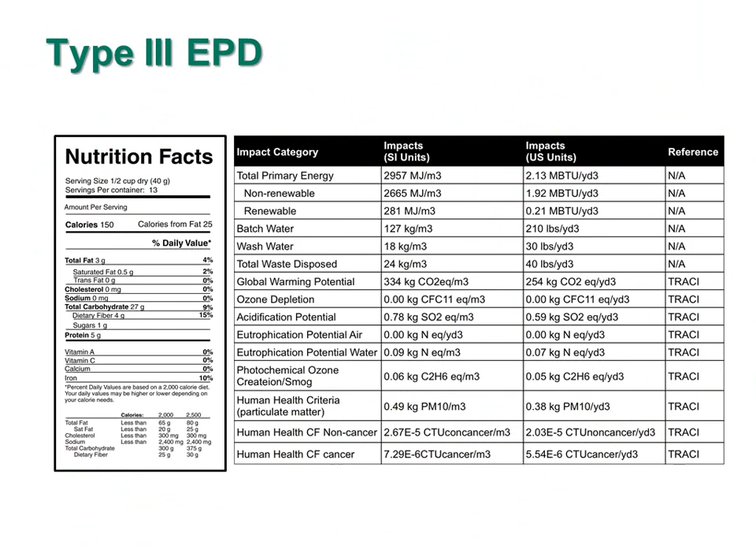So certainly when we look at an EPD, it's really translating that life cycle assessment data into environmental impacts, and it follows the ISO criteria.

Now what's important to understand about an EPD is that you can use an industry EPD, which we're seeing right now in North America. You can use a company EPD, which is more product specific, where a company goes ahead and develops their own EPDs, and these can be specific to a certain plant even. So it can become much more detailed, as detailed as you'd like it to be.

EPDs are reviewed and updated every 3 years, so again this is a work in progress. Just as we've seen more technical stringency, we're going to have to see an update of data because processes change, the way we manufacture changes. So when we see new cements and new products, their impacts have perhaps changed, and we need to account for those.

So if we look at life cycle assessment again, I'm not going to go through this in detail because Dr. Noguchi did a very nice job, but we can look at the part of the management standard and say, okay, if I'm making concrete, what am I concerned about? I'm certainly concerned about the cement, the aggregate, and the water, the materials that comprise concrete.

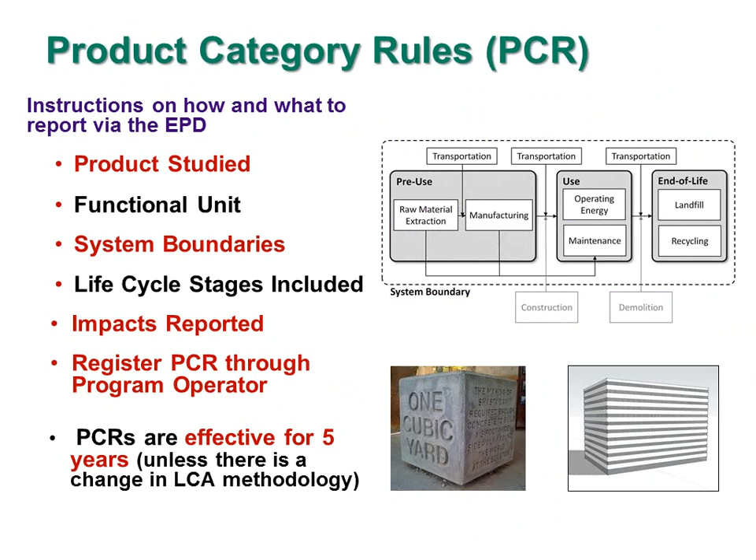Certainly, then we must register the PCR, and this is done through a program operator, and as we saw, ASTM is going to become a program operator. There are other program operators such as NRMCA - there are varied program operators. PCRs are effective for 5 years unless there's a change in the life cycle assessment and methodology.

So again, we're comparing apples to apples, 1 cubic yard of concrete versus 1 cubic yard of concrete. We're not comparing concrete versus steel - they're separate. So how do we make the EPD then? How do we go forward?

Just like when we looked at LEED and said this concrete is an assembly of materials, we must now additively look at all the EPDs that go into concrete. So you would have the admixtures, you would have the EPD for aggregate, you would have the EPD for slag cement, for fly ash, for cement. These all go into this product that we call concrete.

And then you would take all the EPDs from all the different products that are used in the building, and we would collectively put them together to create the whole building life cycle assessment.

So can we do this for concrete? Everyone finds this quite frightening. We have thousands of mix designs. What are we going to do? We have a new mix design developed for every single project. How are we going to account for that? Yes, it's going to be difficult, but it's not undoable.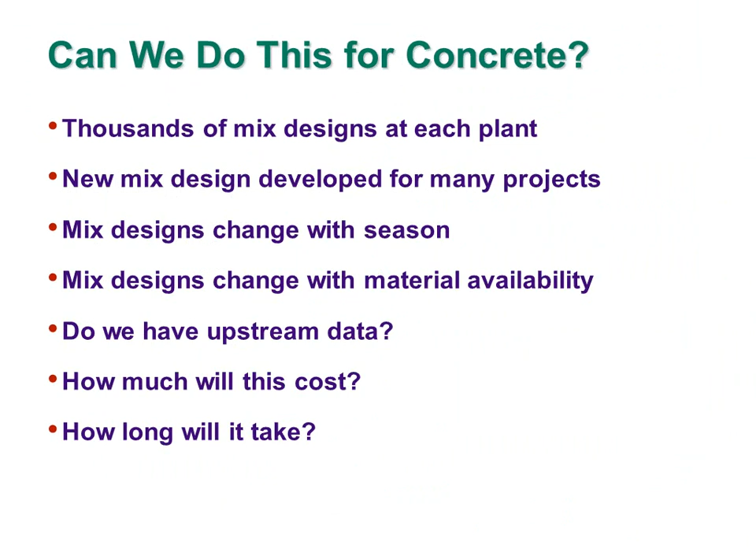So we have to look at upstream data. We can look at averages. The PCR for concrete has been developed by the Carbon Leadership Forum, but it is being reviewed and revised under ASTM at this point. If we look at the state of the industry for the PCRs we're concerned about, concrete, cement, slag, and fly ash are all in different steps for the PCR. All of these are industry PCRs at this time. There's only one company that has an EPD out at this point.

So the PCRs have to be developed before we can make the new EPDs. Going back, when we look at the PCR, what is the declared unit? In this case, it's 1 cubic meter or 1 cubic yard of concrete. What's required? We need to know what is the specified compressive strength at the age - so it's either 30 MPa at 28 days, or whatever the MPa of that concrete is. Because if I'm choosing concrete from producer A and concrete from producer B, I can't compare 6,500 PSI concrete versus 4,000 PSI concrete.

They're different, so I have to look at them equivalently across the board. Optionally, you can look at exposure class. We could look at some design criteria or other performance criteria. We're going to have to look at the life cycle stages - raw material supply, what is the transport, manufacturing, the construction process. We can look at transportation. These are all the things that are going to feed into our final LCA.

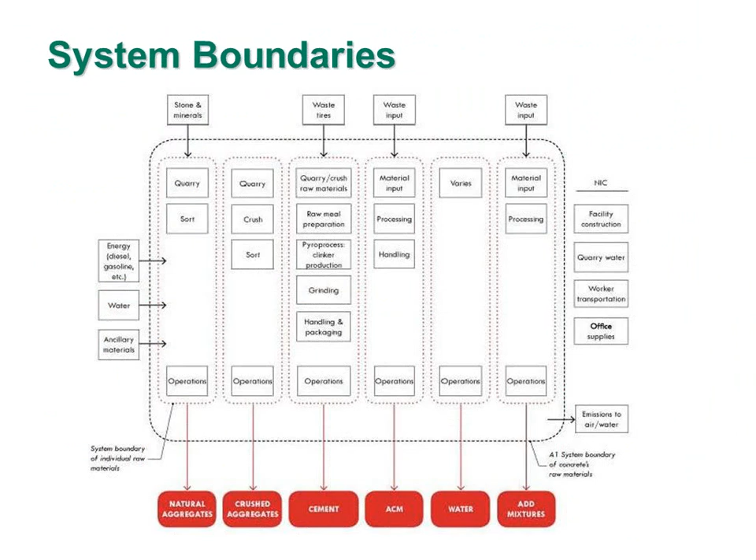So impacts that need to be reported are based on ISO boundaries. We're going to be looking at climate change or carbon footprint, ozone depletion, acidification, eutrophication, photochemical ozone or smog, and all of these are under TRACI, which is the Tool for the Reduction and Assessment of Chemical and Other Environmental Impacts.

Some life cycle data that can be reported as well is primary energy, total water consumption, looking at the concrete batch water, hazardous waste, use of primary energy, carbon emissions from biofuel. So everything we've talked about in the sustainability world and the impacts we might see are really viewed quite scientifically when we start looking at PCRs and EPDs.

So a selection of data - are we going to be very plant specific? Are we going to use company weighted averages? Can we use a regional weighted average? We have to be ISO compliant, and we have to make sure that the life cycle inventory data, which is basically the data that everyone is giving for the input, is reviewed. Certainly we need to look at the default LCI sources, and these right now in the PCR for concrete are being included in Appendix B, and again ASTM is reviewing this.

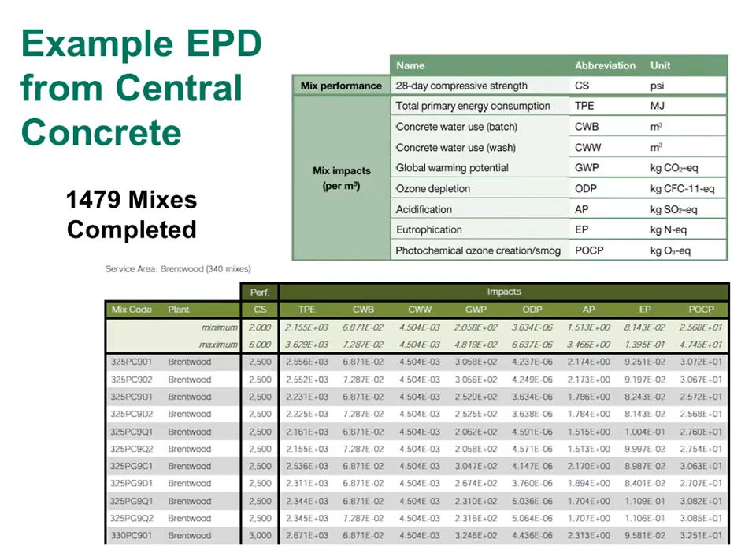So when we look at their document, it starts out that it's an EPD. It's talking about service areas that are covered, so this is actually looking at eight plants. And you go on to the next page. It's a declared product.

Program operator—so who was the person that helped them put the PCR together? That was NRMCA. Who is the LCA developer and EPD developer? It shows it was Climate Earth.

Who was the independent verifier? So you have verification by one group, but then it must actually be third-party review too. So they had a third-party review from Athena, and then they talk about the product category rule and the date of issuance. They have product description, the declared unit, the life cycle assessment, a summary, and again a summary of the limitations of the EPD.

So there are limitations obviously that we need to be aware of. Some of those limitations are that life cycle impact assessment results are a relative expression. So they're saying they're data, but there are some boundary conditions related to them.

Certainly if we look at Portland cement, they describe the products comprising the EPD and where they might have received that particular EPD that rolls up into concrete. So they have Portland cement, fly ash, slag cement. And again, because these PCRs and EPDs were not developed yet in the United States, you can see that they actually used the EPD from Switzerland because it's the best one that they had to use at the time. There are little differences between the European system and the North American system, but it's the best they had. So they went ahead and used these.

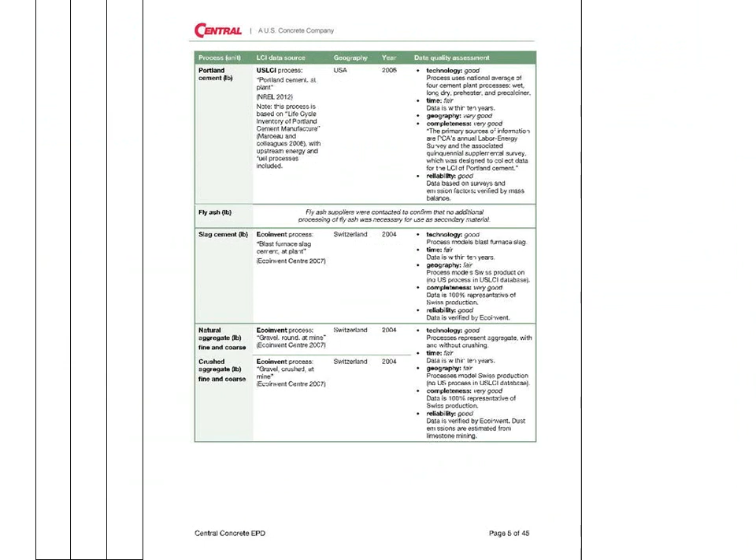And again, for accelerating admixtures, they're looking at their admixtures, and again, the geography from the EPD they used was Europe, because North America is still in the developmental stage of some of the EPDs. All right, environmental impacts—I'm almost done here.

Appendix, again, they're mix designs. You can see they came out, and they list all the types. So the data needed for the LCA includes the materials used over one year, the distance to the material supplier, the energy, water use, and mix designs.

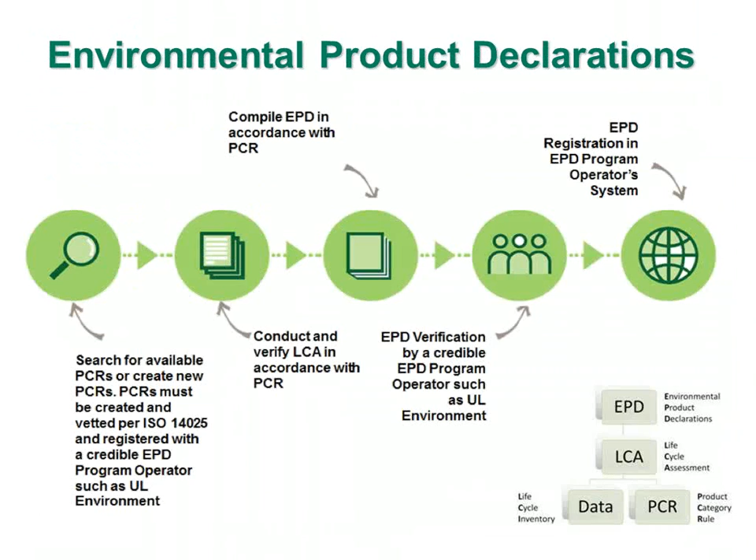And again, going through the system, you search for the PCRs, or a new PCR must be created. You conduct and verify an LCA. There's verification, registration—so everything has a very nice order to it.

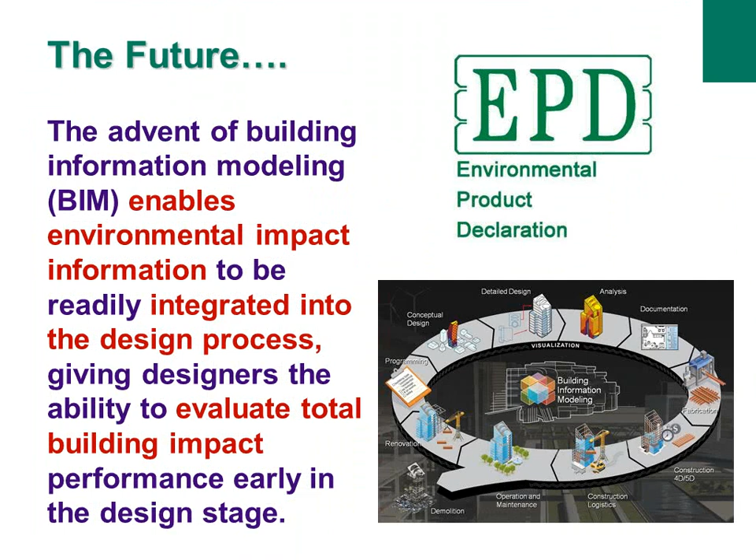So EPDs are here. They establish relevant boundaries. There are industry averages that can be used, but certainly I see this as a step forward toward more stringent requirements and more scientifically based ideas when we look at environmental impacts.

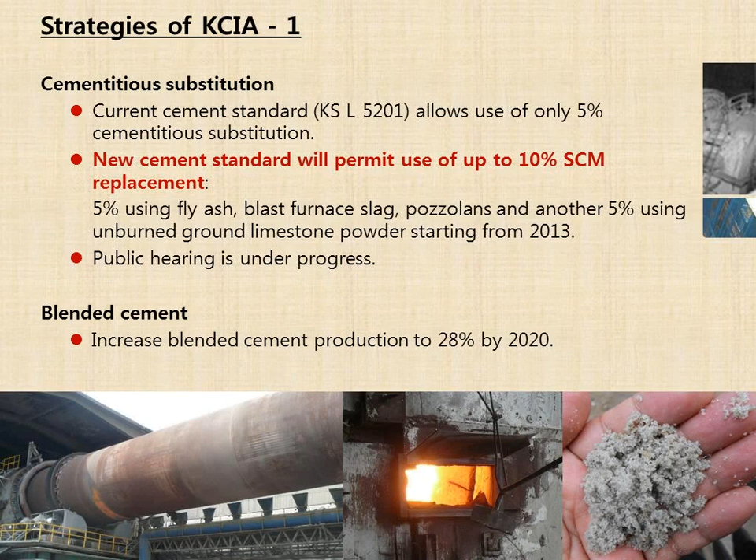I know the U.S. has already established this kind of standard, and we are following the same path. We want to increase the usage of blended cement up to 28% by 2020. Currently it's 20%. The other 4 strategies will contribute, but not as much as the first.

The second strategy is a new cement standard on Portland limestone cement. I know Canada has already launched this kind of standard, and we are trying to follow the example of Canada and some other countries which have already done this. We try to complete this draft by January next year.

I was the driving force pretty much behind this one. The Architectural Institute of Korea has recently revised their construction standard specification, and we are now requiring the constructor to submit an environmental management plan for construction before the construction begins. There are 2 paths, mandatory and optional, and the mandatory path includes increased use of reused recycled amount and C&D waste, and environmental management on site.

The optional path includes greenhouse gas emission, reduction of the use of natural resources, and water management. This should be done in practice in Korea now.

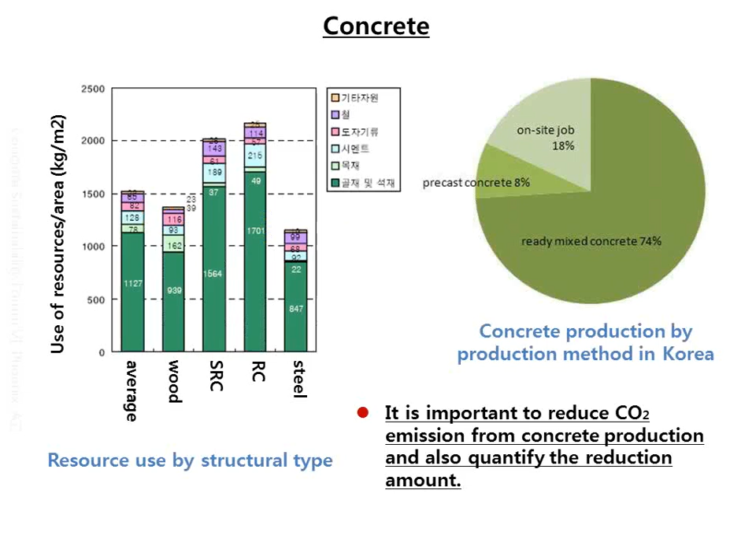I want to give 2 specific research case study results briefly. The first one is called CO2-based SCM design. This is similar to what Professor Mueller presented earlier today. About 4,000 mixed data have been gathered by a research team, and we wanted to analyze this in terms of the so-called CO2 index, which is CO2 emission divided by concrete strength - emission per unit strength.

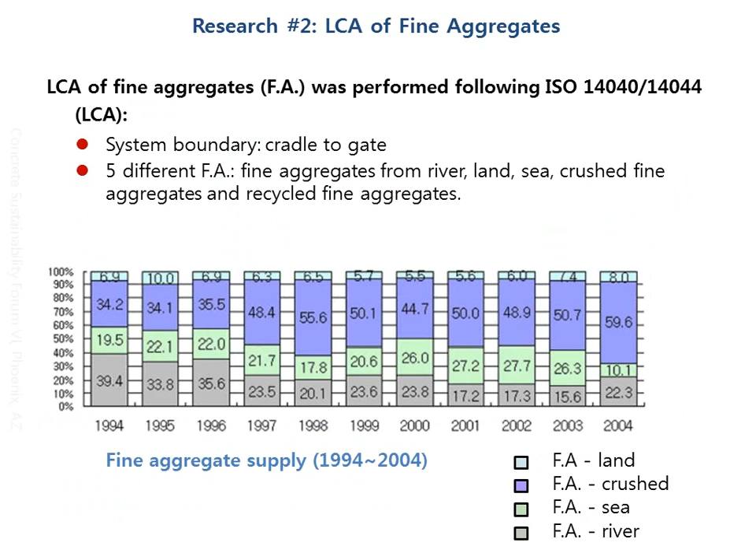As we have expected, environmental impact of crushed natural aggregate was the highest among all natural aggregates. You can see this in terms of use of energy and greenhouse gas emission. But perhaps more importantly, environmental impact of recycled aggregate production was really huge. I don't want to disclose a specific number here because it's just a result of one study, but it was really significant, and we should discuss in the future about what we can do about this.

Now I want to come back to this issue of standards, which is the main subject of my presentation today. In Korea, the greenhouse gas emission is mainly controlled by government. So greenhouse gas guideline in general, guideline for cement industry, guideline for such and such, controlled under target management.

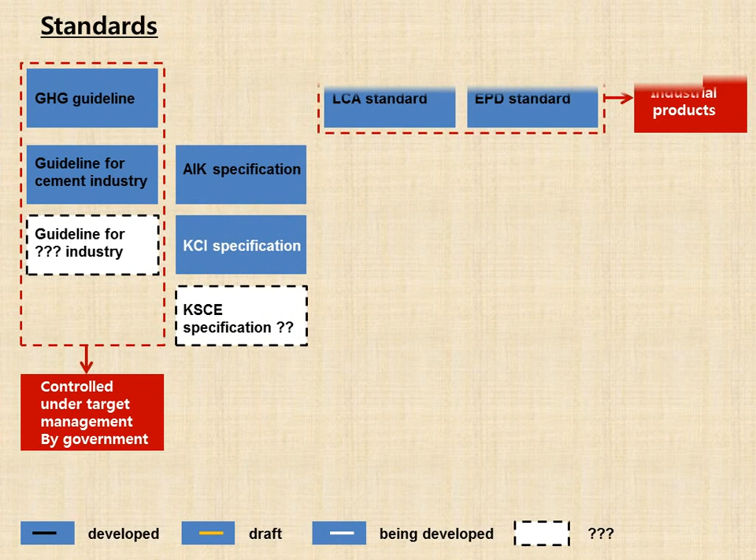For concrete, what we do is shown in the large rectangular box. For about 10 years, we have been developing LCI database, and we have two kinds, KLCI-DB and APSS. The latter is more construction-oriented, and we have altogether developed 700 or 800 databases, which took a lot of time and money. But anyway, more LCI data are being developed.

In the middle column, there are EPD of cement, EPD of aggregate, EPD of ready-mix concrete, all Korean standards where the final draft has been completed but not yet launched. It's very difficult to launch these kinds of standards in fact. But anyway, we are continuing our effort as I'll show in the next slide. Of course, we have a standard recycling rate.

This is the situation in a standard organization. Dr. Noguchi already mentioned briefly. We have ISO 15392 and ISO 21929-1, which covers all three sustainability aspects of environment, economic, and social. ISO 21930 is the main one for the EPD of a building product, and many countries are following the example of ISO 21930.

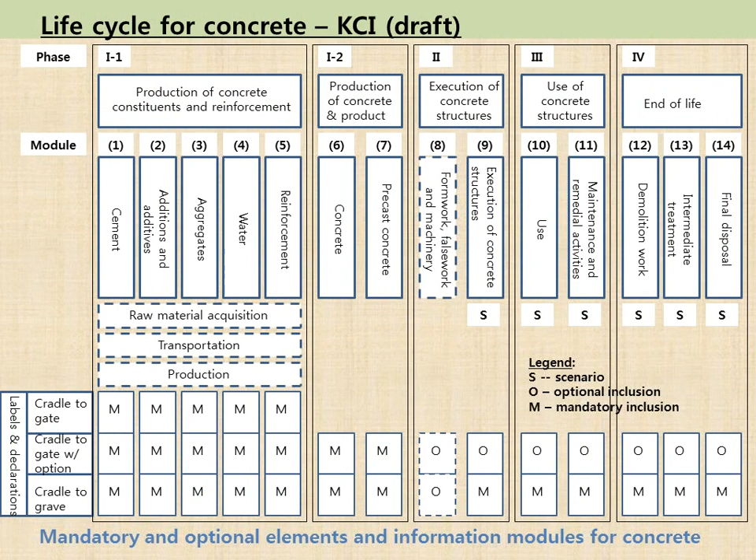So why do we have to do this? What will be the objectives of the EPD for concrete? We have defined 4: to provide environmental information to be used as a performance criterion for concrete, to facilitate communication of the environmental information involved within the life cycle of concrete, and to enable producers of concrete to reduce environmental impact. This will be the direct target.

And the last one, to enable designers or constructors to reduce environmental impact on concrete structures. I think this is a more long-term target which will be more complete with some kind of new concept like environmental design, as Professor Noguchi mentioned.

Yeah, this may be the last slide, but without about the conclusion. KCI and we have developed this type 3 EPD of cement, aggregate, and ready-mix concrete, and also we are working on concrete. One more thing: as I said, we have spent about 10 years to develop this LCI database. I think it's very difficult, very costly, very time-consuming.

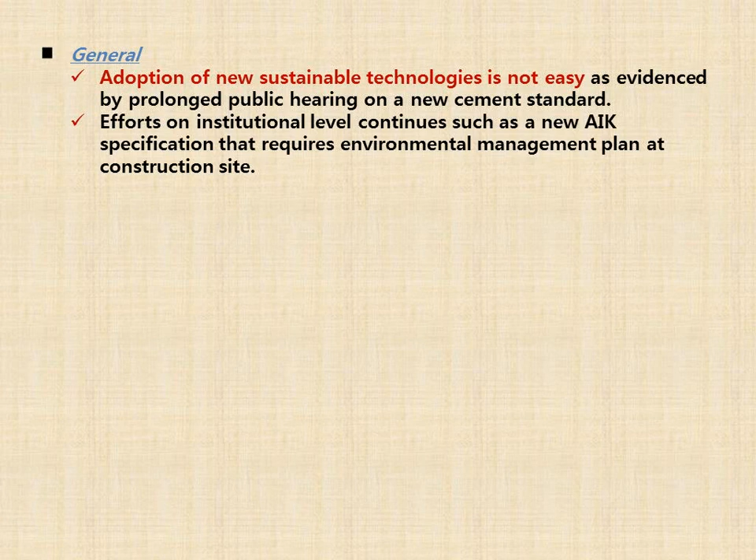continues. As I have shown with two example cases, we should be able to expect what kind of CO2 amount, reduction amount can be achieved at the design stage, and we need technology for that. And I have shown an example.

And I think we need to work on environmental impact categories. I have asked the question to Professor Miller already. He used something called the eco-balance. Yeah, it's not ISO, I know. Julie already mentioned EPD, the newest version. It includes 4 mandatory categories. Yeah, it's been agreed in the US, I understand. But will that be the same in other countries? Or will that be internationally agreed?

I think we need more sound scientific proof or result of research in that area. A good example, I think, is CML performed by Leiden University in Europe. But that is for the building construction in general. So we need research, similar research in the concrete area, I think.